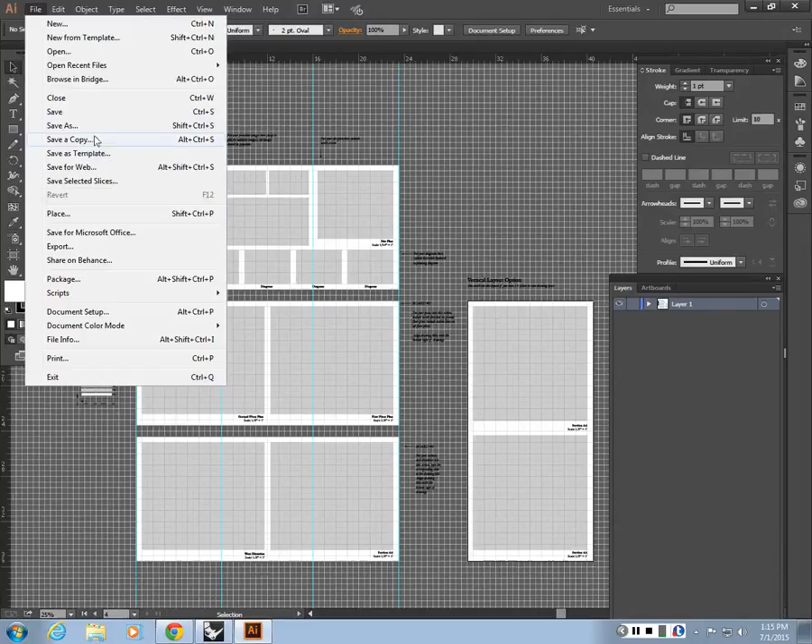I go to File, Save As, and choose PDF. I went over some of these settings with some of you, but the reason why you're setting up artboards is because we have access to what page we want to print. By default we are using artboards, and I have 4 artboards in this file. I can print any one of them directly, or print intervals as well—1 to 4, which is all of them, or 2 to 4, or 1 to 2. If I want to reprint one, I just enter 1 and I'll get a PDF with that single artboard. That's the whole point of using artboards.

So I'm going to do all, and call it test 1. I'm going to save it. Now I get this Save Adobe PDF interface, and here I'm going to choose press quality so that my compression is minimal, so the quality of the drawings is maintained.

Now, if you go to Marks and Bleeds on the left, if these are unchecked, you won't get bleeding marks around your boards. So what do I mean by that? I'm going to save the first one without the bleeding marks, and do the same thing again, calling this one test 2.

Save. Again, press quality, and go to Marks and Bleeds, and just check here so we get trim marks, registration marks, color bars. You actually don't need the color bars or page information—all you need is trim marks, but I'm just going to show you what those are. I'll save it as PDF. Just keep the offset as is, that's fine, that's enough.

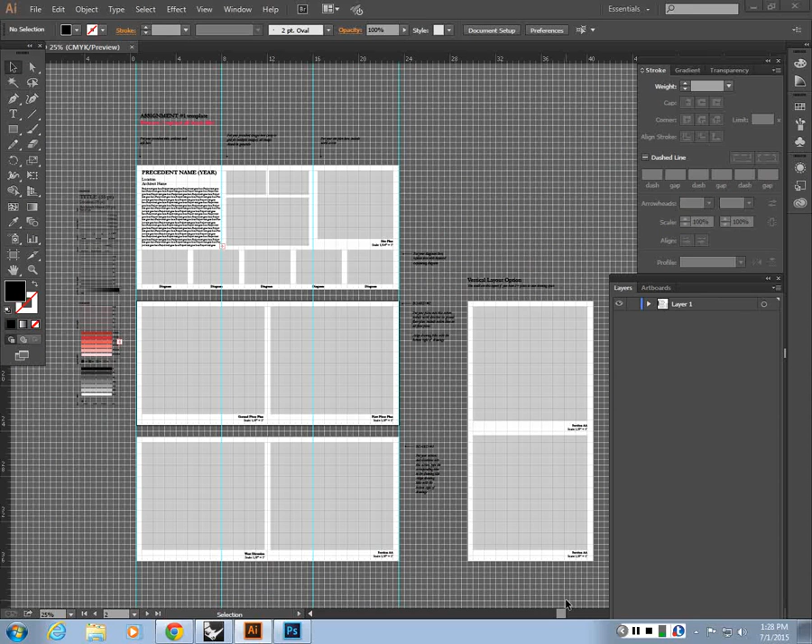Solid modeling in Rhino. We're going to be modeling a staircase, something like this, in 3D. Okay, I'll write the dimensions on the board.

Go to Tools, Options, Units, and change your model units to feet.

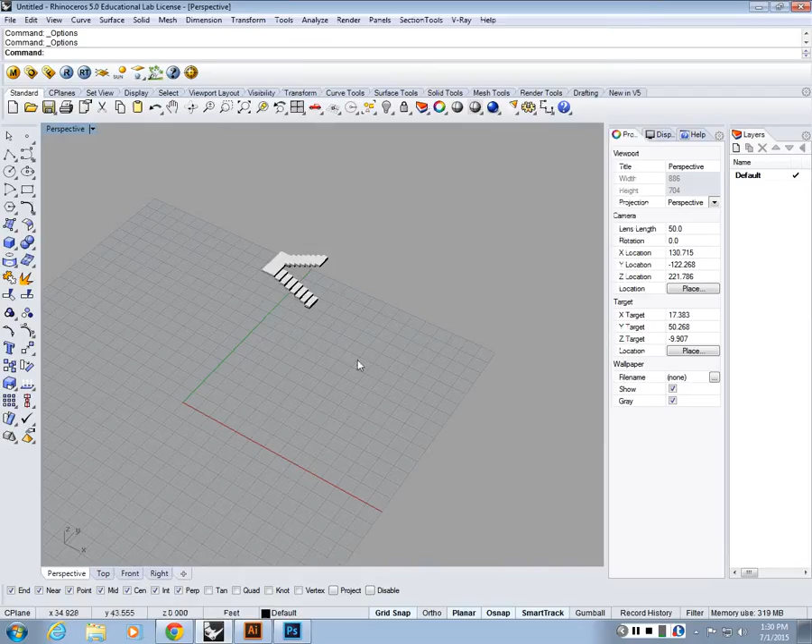After you do that, double click to your viewport to minimize it so that you get 4 viewports. We're going to work on the top viewport for now, so I go to the top viewport. I'm going to draft my staircase in 2D first, then we can use it to do the 3D modeling.

I'm going to start with the line tool. I'll turn on grid snap, and you can also turn on your ortho. So I have ortho and grid snap on, and I have the endpoint snap on. I'm going to come in here, start from the origin, go up by 5.

Then I'm going to go right. I'm going to have 8 steps, so 8 by 2, it's going to be 16. That's the first rectangle.

Now I'm going to have a landing. I'm going by 5, go up by 11, go down by 5. Just watch me for now. And then this rectangle, I'm going to have it on this side as well. So that's the outline of my stairs. These are my 2 runs, this is my landing. I'm doing a 2D drafting of my staircase.

I'm going to put on a layer as well, so these are going to be outline. Then I'm going to have one more layer as steps, and I'm going to switch to that layer, come in here.

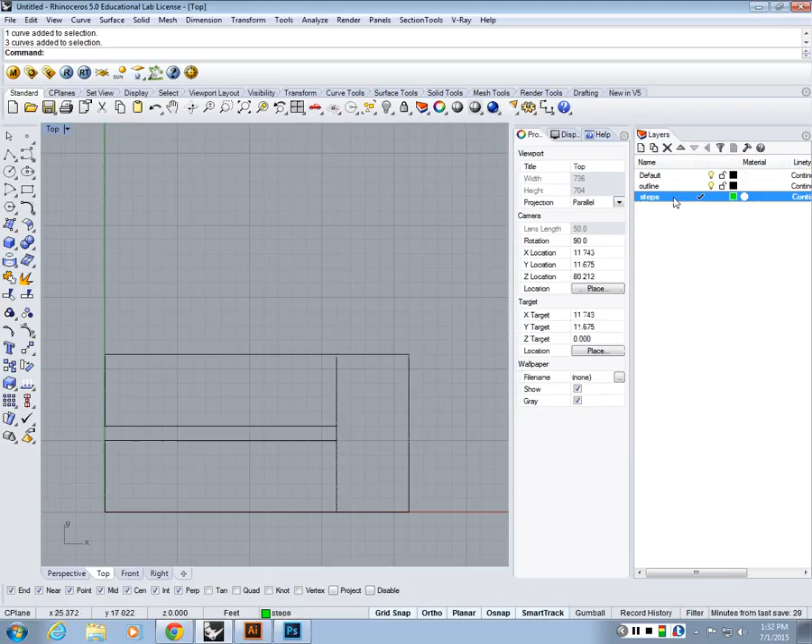Draw a line. Actually I can do this since I have... let's see. Let's draw this, and then offset, distance 2. I'm going to add my steps. After I edit these, I'll select them, do copy, and then put them there. So that's basically the outline of my staircase.

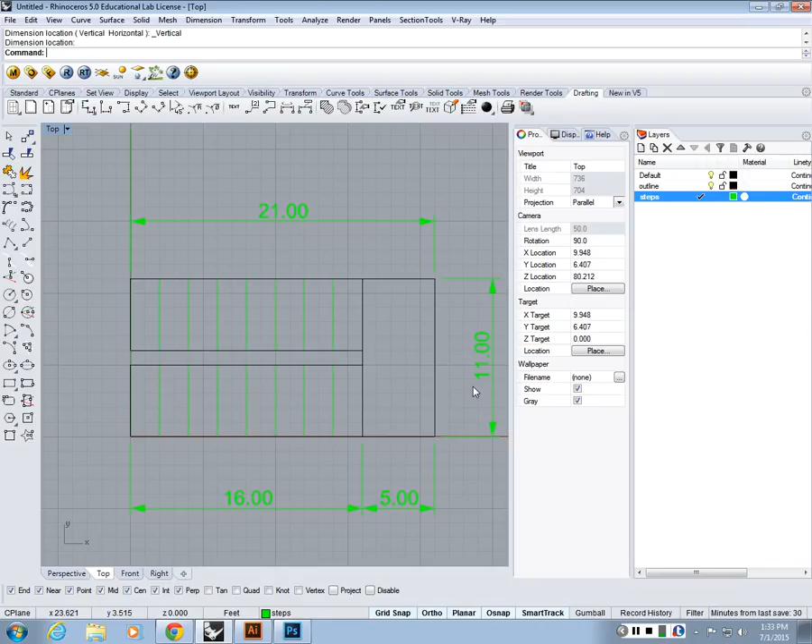I'm going to draft the dimensions so that you could do the same. These are my dimensions, it's under the drafting tab. So that you can draft it as well. Okay, I'll wait, I'll give you a couple.

We're going to start modeling in 3D. I'm going to first outline one of these steps here, so go to the standard tab again. Grab the rectangle, and I'm going to draw a rectangle here from that corner to this corner, so that now I have a rectangle there.

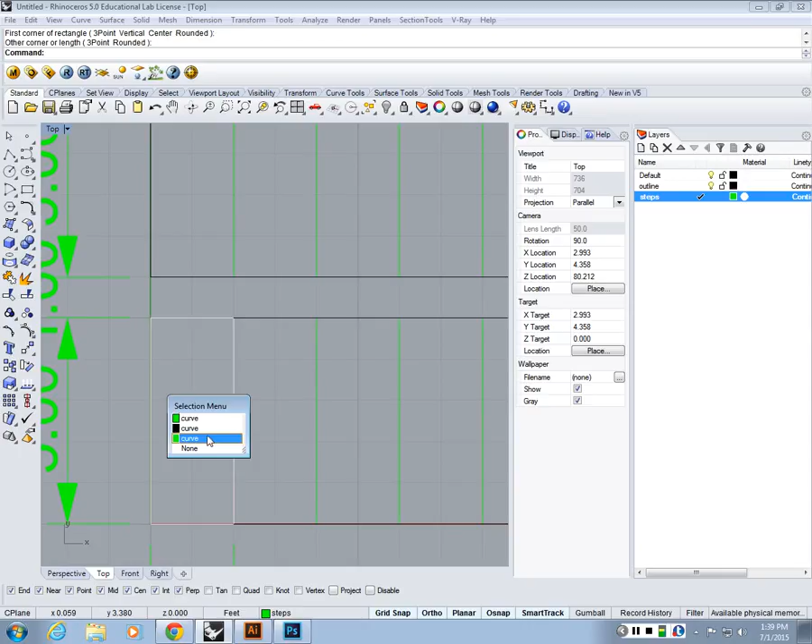Now you'll be drawing over an existing geometry, and when you want to grab the rectangle, if you click on one of these lines, it will bring down a list of items on that intersection, and you can iterate through the selection menu to grab the rectangle you just created. It will be the last one. Right, so it's this guy. Doesn't matter.

Once the rectangle is selected, I'm going to double click to the View tab, move to the Perspective tab, and double click to the Perspective. I want to zoom to the geometry, so I'm going to click here, zoom selected, or the shortcut will be ZS for zoom selected. Once you execute it, it will show you the rectangle, whatever you have selected in Rhino.

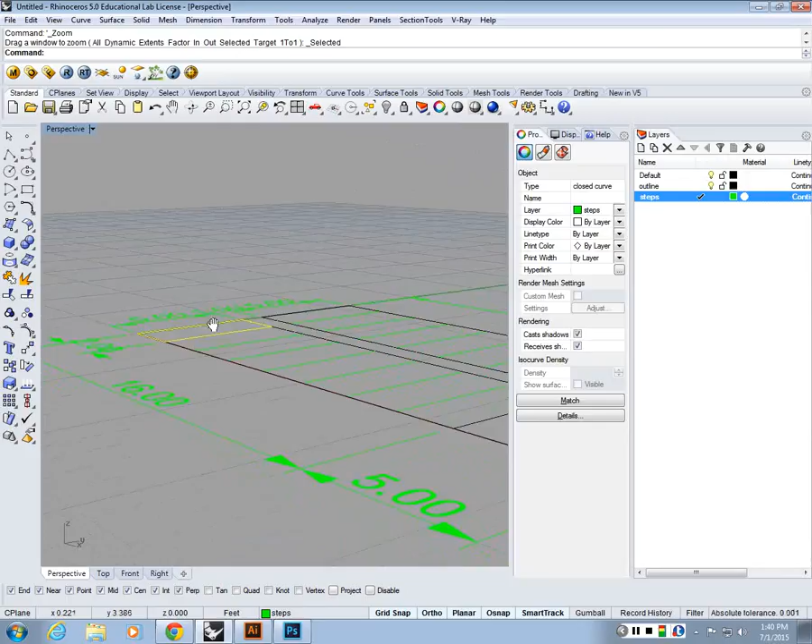You can use the roller to zoom in, zoom out. You can hold right mouse button to do orbiting around it so you can examine it. Or you could hold shift and the right mouse button to do panning, so you can move up and down, orbit, zoom in, zoom out. So that's kind of the 3D navigation.

Now I'm going to turn this into a solid step. I'm going to type in extrude curve, and that will give me a direction for extrusion, so I can go up or I can go down. Look at this value here, look at what it reads. When I go down it's reading as negative, and when I go up it's reading it as positive, because the extrusion also has a direction input.

If you look at the menu, we are specifying a direction, we are not going to extrude both sides, so both sides is set to no. I want this to be a solid extrusion, so hit this to be yes if it's no. You can toggle among these selections by hitting these options. I'm going to make it a solid extrusion. I'm not going to choose the delete input, because if you choose the delete input, it's going to delete the rectangle we modeled.

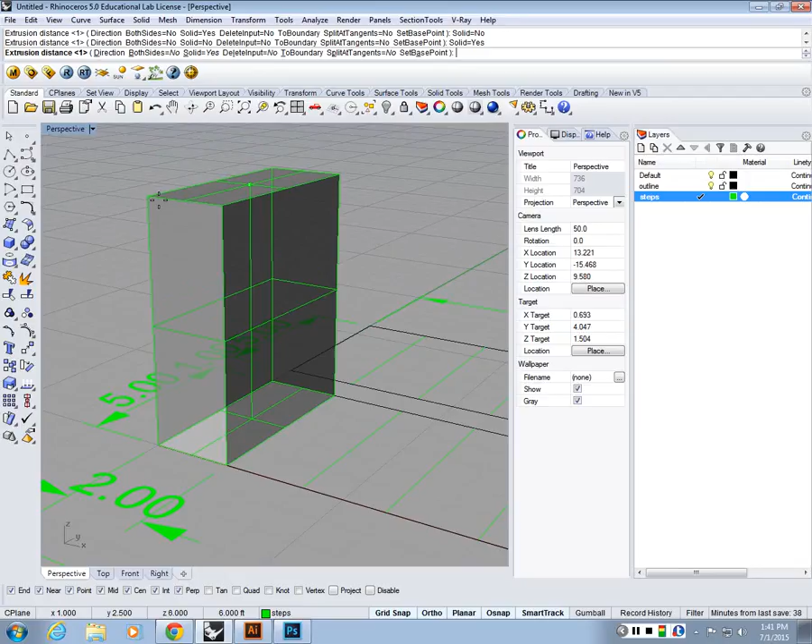And that should be it. The extrusion distance, I'm going to hit 1, enter it here and hit enter. Now I should get a step that is 1 foot high. So this is a 3D model, basically—a 3D box.

Zoom out, roller. Roll in and out.

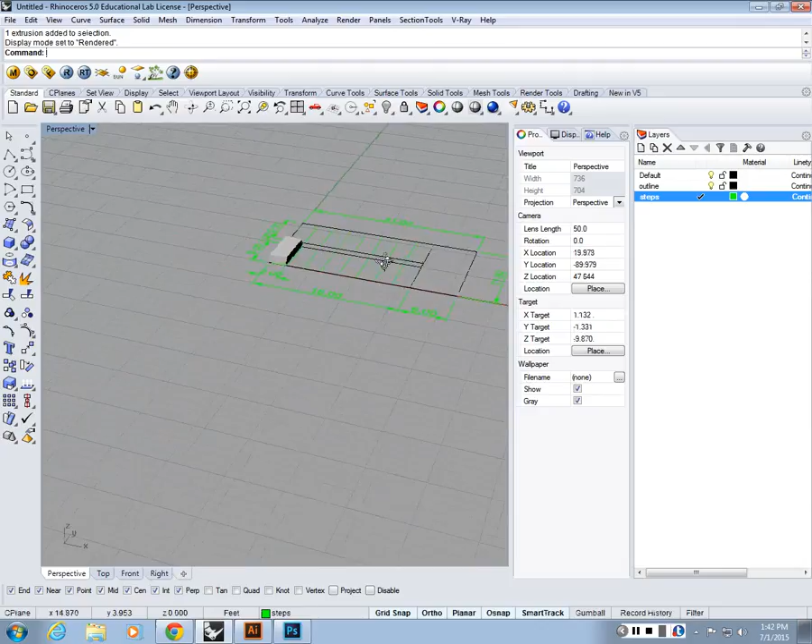If it's not shaded, right click the Perspective tab. Switch to shaded or rendered view. If you're in wireframe, you will just see the wireframe. Right click the perspective, switch to rendered. You could also go to View, Rendered. Yeah, that renders an image though—this is a viewport setting, right?

Now if you got one step, next thing I want you to do is type in copy, select the staircase, select the step. After you select it, right click to confirm, point to copy from. I want you to copy it from this corner to this corner, and then keep doing it.

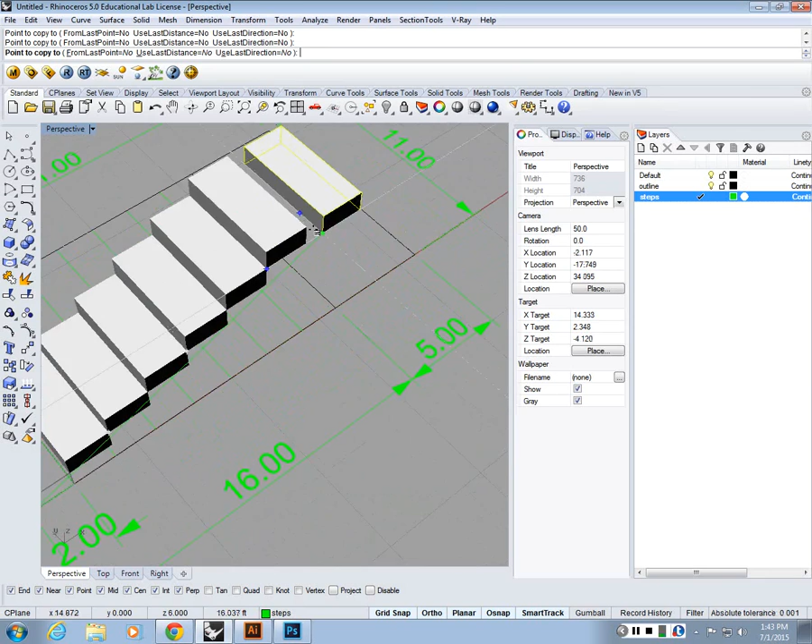So I created one more step. So I have 2, 4, 8 steps here. I'm going to create one more, so I choose the last one, type in copy. Again, I need to use orbiting, panning around to get the right point, right? I cannot just grab it from a weird angle—I may not get the right point. So you want to orbit around it so you can grab the right point. I'm going to choose this corner again, create a copy here.

Now I'm going to create the landing. To do that, I'm going to use the scale function, and I'm going to type in scale 1D, which will enable me to stretch one side of the box. The object to scale is the last step. I'm going to right click.

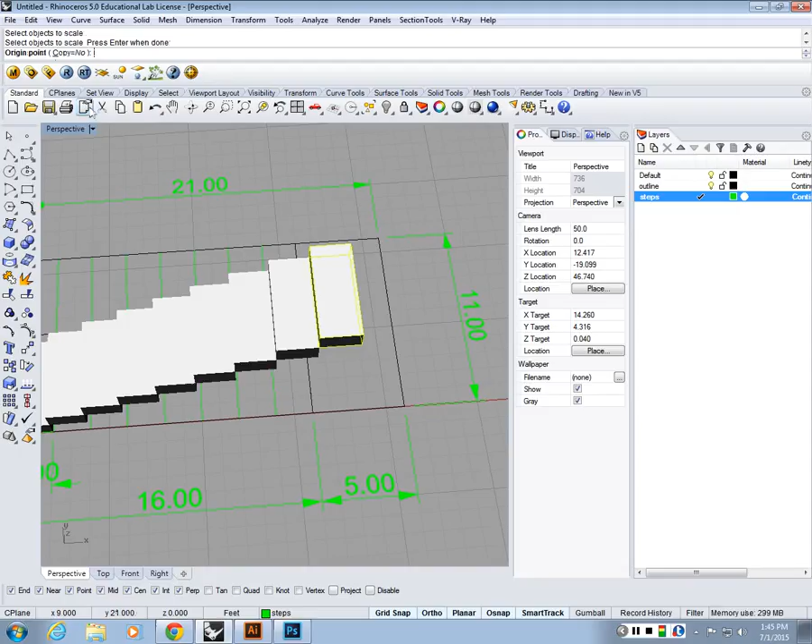Now look at what it says—it says choose an origin point. My origin point is going to be here. I want that point to be locked. And then it says scale factor or first reference point. Let's do reference point. My first reference point is going to be this edge, which is at 2 feet. Now I can stretch this box along that edge, so I'm going to hit 5, and I have scaled the box along that edge by 2.5 point.

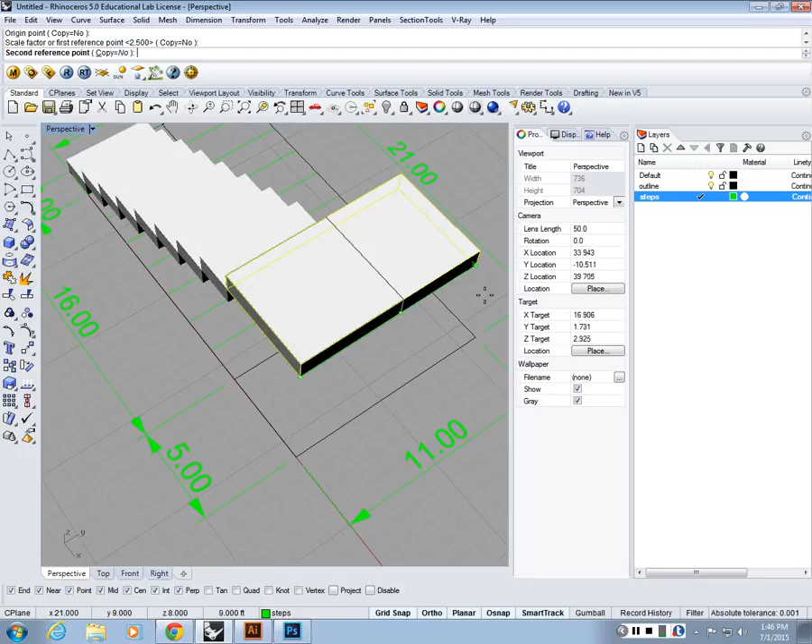Sure, I'm going to do it to the other side anyway. So I'm going to select the same box, do scale 1D again. Origin this time is this corner, the edge is going to be this edge. Look at what it reads—it reads 5 feet, right? That's the width of my run. So I'm going to choose this 5 feet, and I want it to be 11 feet. So I enter 11 on my keyboard and hit enter. So that's my landing.

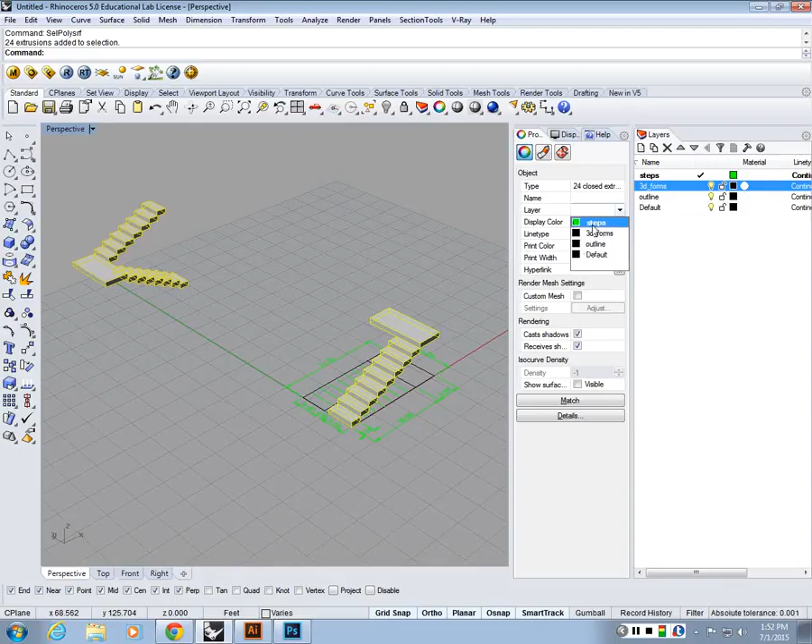So you can choose these by holding shift, and you can go through them one by one, or simply if you want to choose all of them at the same time, you can type in Select Polysurface, and that will choose all the solid objects in the viewport. And then I want to change their layer to 3D forms. And then if I hide those, I can switch back and forth between curves and forms, right? Curves and 3D models basically.

Now I'm going to just select this layer and hide everything else so that I only have solid forms in my viewport. And then the next thing I'm going to do is model the rest of the staircase. To do that, I'm going to choose these steps here—look at how I'm choosing them. I'm drawing a marquee from left to right. The solid marquee selects everything that it encompasses, right? It just highlights, so I get all these steps into my selection.

I'm going to type in group. Group will temporarily put these in a cluster, so if I select one of them, all of the items in that group will be selected, right?

I can basically put them in a group, and then if I want to take them out of the group, I select them and do ungroup, and now they will be individual objects again. So it just helps you model in groups if you have something repeating.

So I'm going to group these items, and then the next thing I'll do is a copy of them. I do copy again, and I want to just move it around, so I move a copy here. It doesn't matter how far it is.

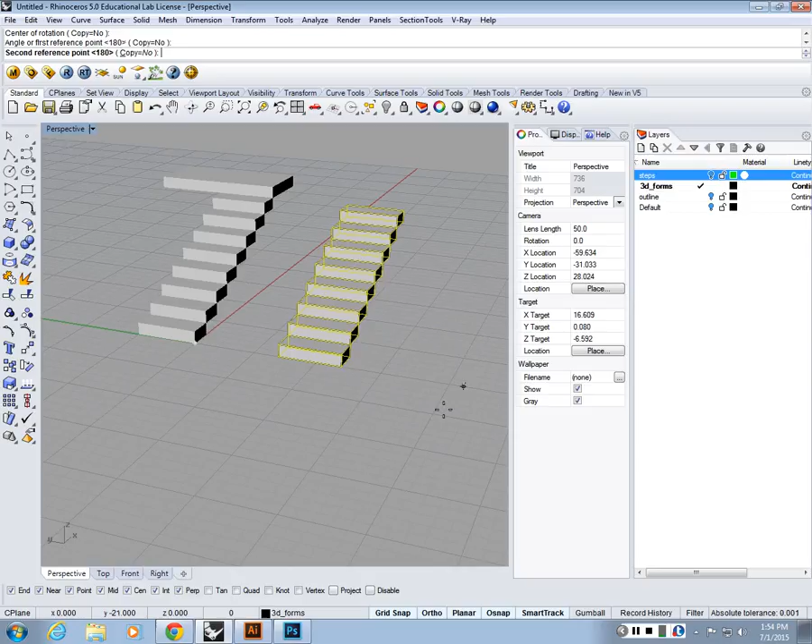I'm going to rotate this guy 180, so I type in rotate, choose these steps. Center of rotation, I'm going to choose this corner. You can either do this graphically by choosing a reference line and rotating along it, or you can just enter 180 and it will flip to the other side.

When you get to there, the last thing would be to move it using this corner point to that corner. So you can just snap it back to where it is.

Okay, that's my staircase. You want me to do it again? Okay, so select these steps, group them, make a copy, rotate 180, and then put it to the other corner.

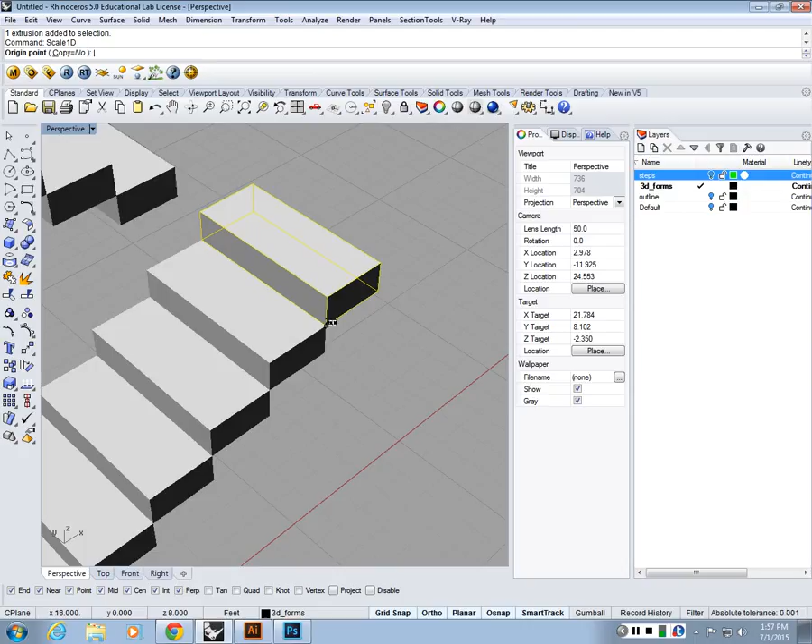Here is my step, I make another copy of it, copying from this corner to this corner. Then I choose this step and type in scale 1D. Follow the instructions for the origin point - the origin point you select will be a point or edge that is fixed on the geometry. So I want the step to be fixed on that corner, and I choose this as my origin.

It says scale factor or first reference point. I'm going to do the reference point, so I can grab a dimension on the object and tell Rhino what I want that dimension to be. I'm choosing this edge - if you look down here, it's giving me the dimension of it. My step is 2 feet, so I'm grabbing the 2 feet edge, and now I'm saying I want it to be 5. I just enter 5, hit enter, it takes the 2 and makes it 5, stretching the geometry along that edge.

The next one, I'm going to do it again to the other edge. I run the same command by right-clicking. Origin point this time is this corner, or it could be that corner, doesn't matter. I choose this edge, and it reads 5 feet. I'm going to type in 11, and stretch it along that edge as well.

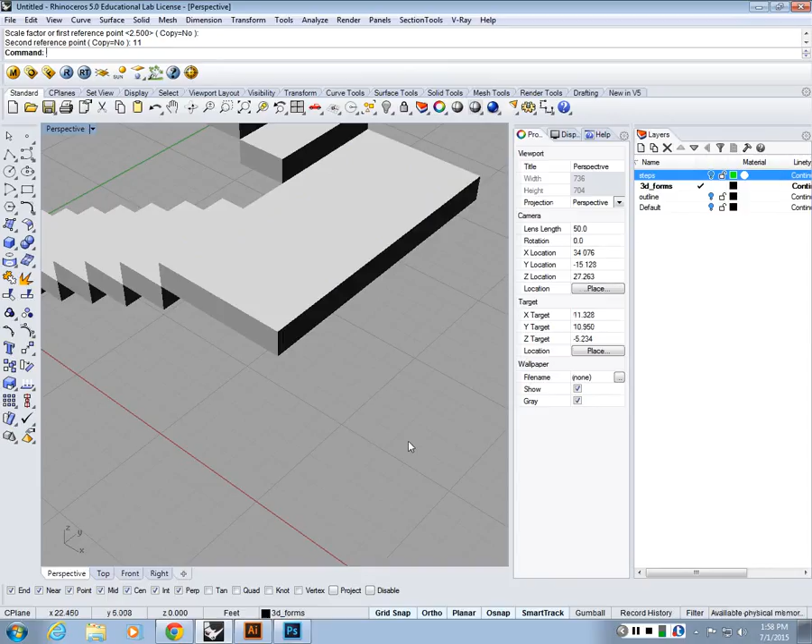Come in here, Tools, Options, Units, back to inches. Okay, you don't want to scale it, choose no. And then go to the top view - your site model right now is 13 by 18, right? That's my starting point.

Now I need some lines here, I need some regions, so whatever dimensions you're measuring. Let's say I have a solid block by 2 inches, so I go 2 inches, then I go by 5 inches, and then close it. Right? So this is how we would do it.

You would come in here, this guy, extrude curve. How many layers is it? It's 3 cardboards. So it's going to be - 1 cardboard is 1/8 inch, so 3 cardboards is 3/8 inches. That's my 3/8 inches cardboard.

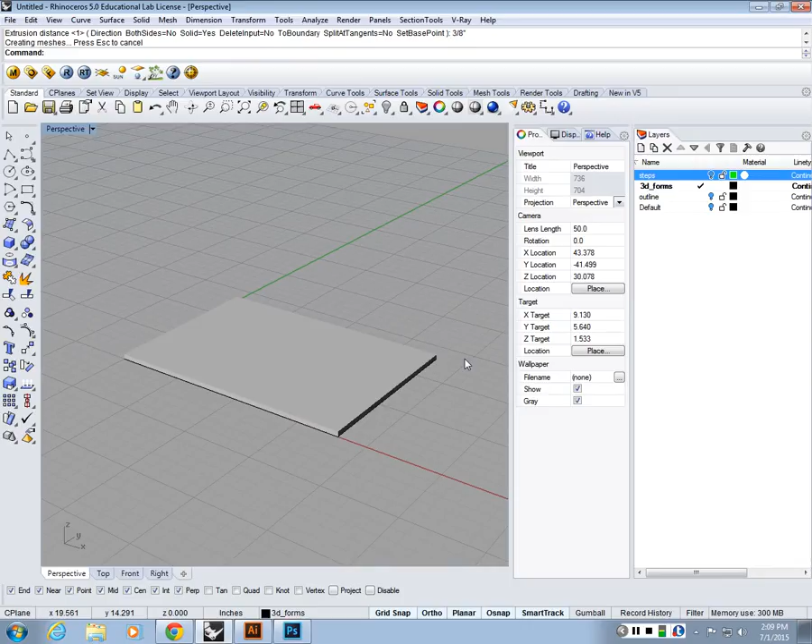You can even do 1 and just make vertical copies of it on top of each other, layer by layer. I'm going to switch back to wireframe, choose this guy, extrude curve - I'm looking at her model. This one goes, I guess, 10 layers, so it's going to be 1 inch.

And then I can move this up here. I'm building it layer by layer. If, let's say there's another layer here, I can copy it, copy this corner here.

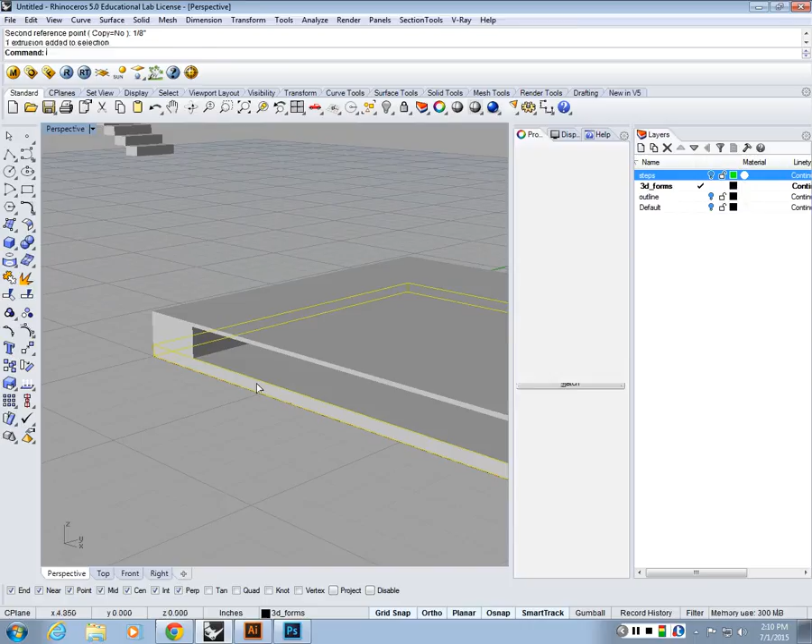And maybe this guy is 1 layer, I can do scale 1D, choose this edge and make it 1/8. This is 3 stacks of cardboard, this is 10 stacks of cardboard, this is 1 stack of cardboard.

And the outlines could be different - I don't know what your model is, but I want you to start working on that. Okay? So she has a stepped landscape, so I want everybody to follow me for a sec. I'm going to draft something that looks like hers, basically.

So I'm going to go by 5 inches, then let's say I go 8 inches here, and then close it up. And then I'm going to do from this side, I think it's another 6, and then this way, 12, and then 7.

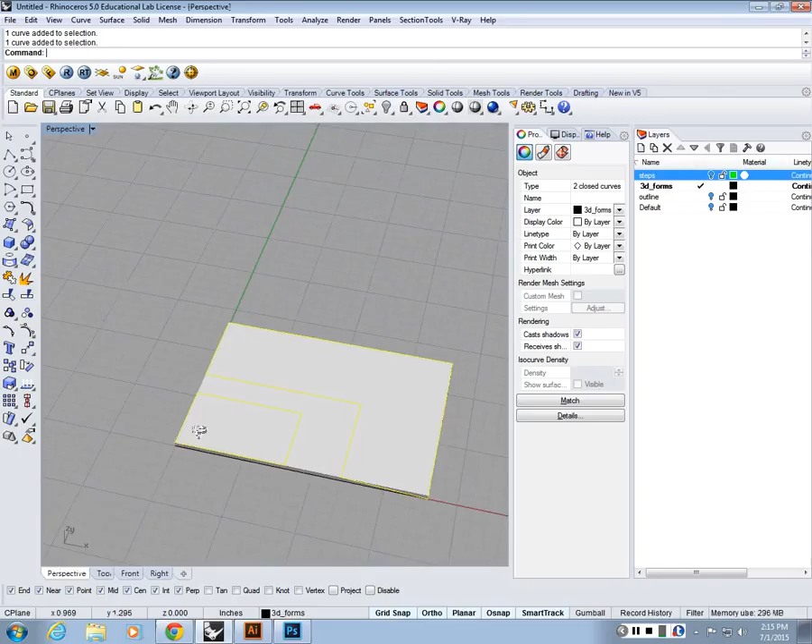Right, so it's something like this. On her model, these guys are solid extrusions. So I'm going to extrude this guy by 1, and I'm going to extrude this one by 1 as well.

Let me fix that quickly. So she has steps here, and she's asking me if she has to do each layer by layer. You don't. You can do it this way, out of solids. So measure the landing here. What is the landing? Let's say it's 1 foot, so go 1 inch. I go to the other side, close it.

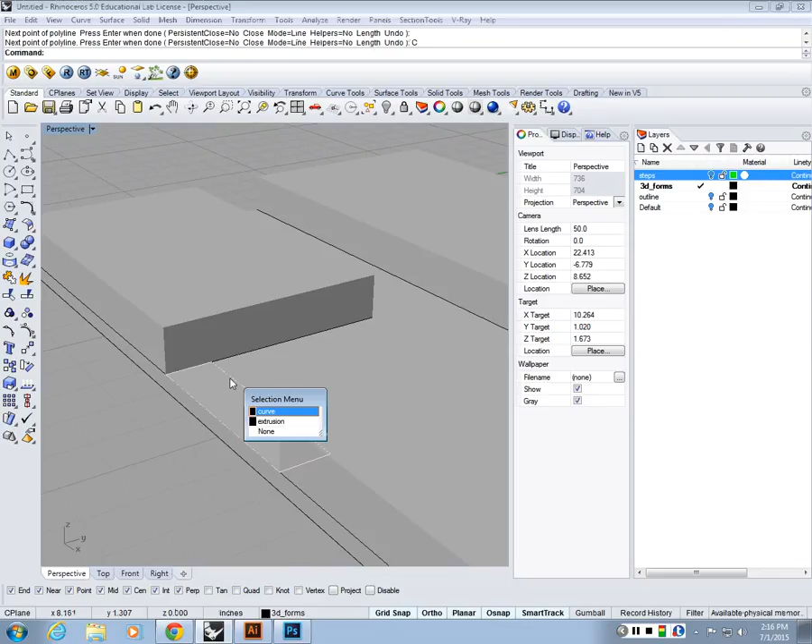I'm going to extrude this guy by 1 as well. Now I can add the steps here. I can model a little staircase here that goes all the way up. So all I have to do is model 1 step and then make copies of it until I touch the ground. How do I do that? I can just grab this guy, copy, make a copy of it here.

What is one step size? I'm going to do scale 1D, choose this edge. Let's say that edge, 1 inch is going to be 1/4. That's 1 step, height-wise, 1 step is going to be 1/8. So that's 1 step, and then copy. Choose this corner, copy it up. Boom, boom, boom.

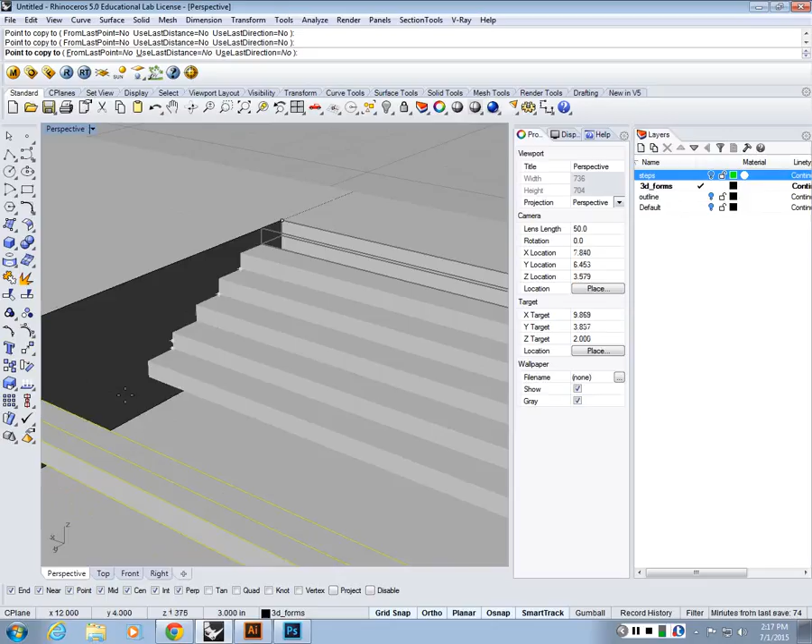That's it. It's easier, no? Find what the solid extrusions are and then add the steps, add the layers on top of it. Okay? Does that make sense?

If I have something here, I can just go up 1 layer, break this down. Let's say this is 3. Maybe there's another one. And this guy is actually shorter. Right, let's say this is 2. And then height-wise, it's like that too.

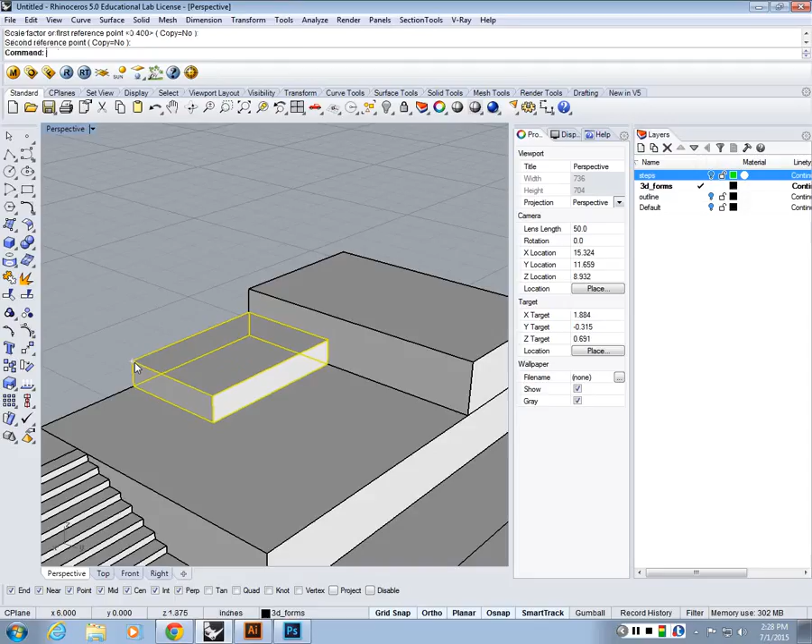So rather than stacking up 8 layers or 4 layers of these L shapes here, I can just break that whole box, that whole mass, into these 2 blocks. And that's what I want you to do basically. And then if there are steps here, you can add the steps later. So you can add model steps here and model steps there. You don't have to draft it layer by layer.

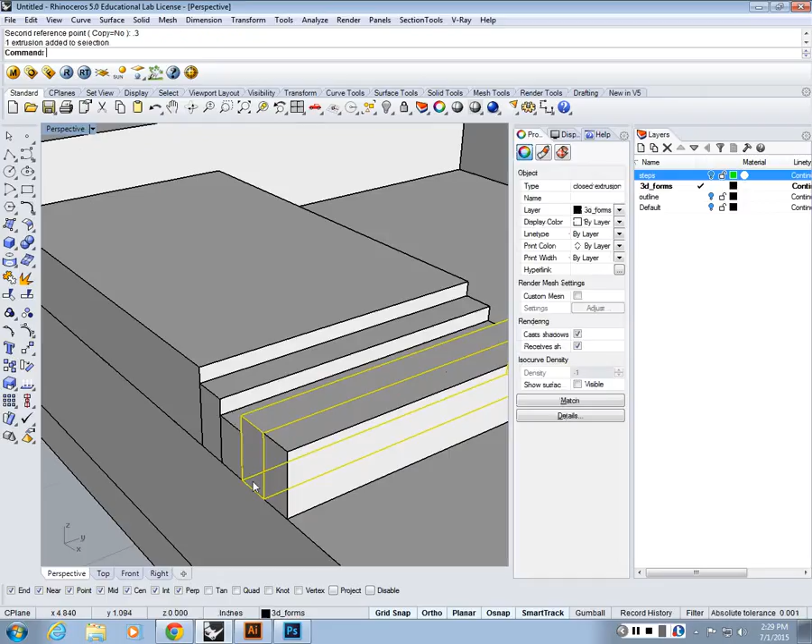Alright, I'll show you what I mean. So copy, scale 1D, this guy is going to be 0.2, and then height is going to be 0.4. Scale 1D, the height is going to be 0.3. Scale 1D, 0.2. Scale 1D, 0.1. I can add those blocks.

Everything could be added up afterwards. And if I need to stretch these, I can also grab the staircase, do scale 1D to all of them at the same time along a common edge they're sharing. So I want to maybe stretch these to be half, so I can just stretch all of them along that edge and make them half. And maybe this guy is repeating, so I can choose that, group it, and then copy it and place it here. You can reuse some of the models you're making. Alright?

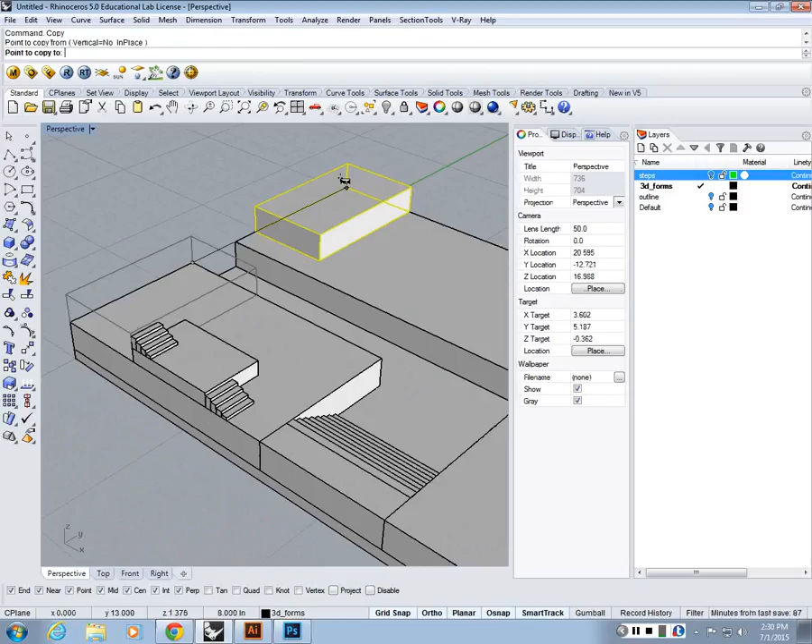I'll actually have fun with mine as well, while you guys are working on yours.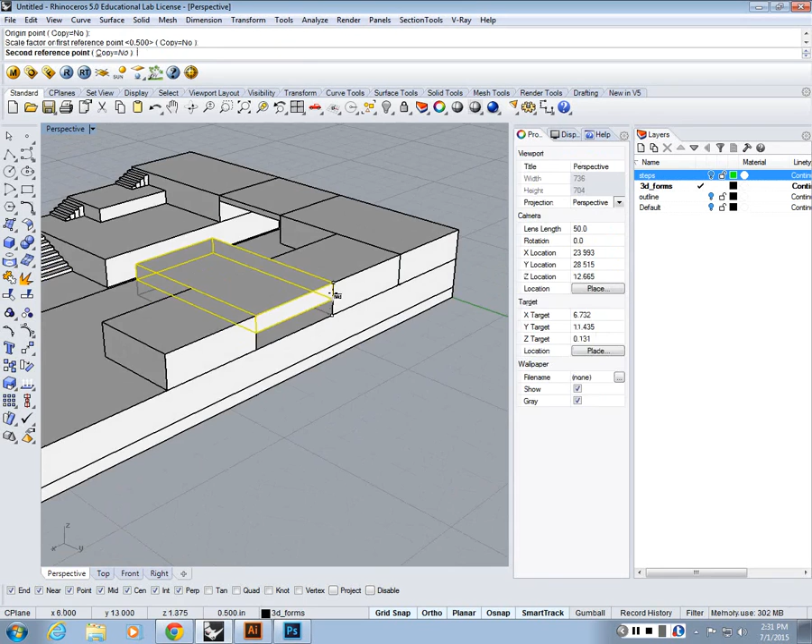So maybe there's another solid form here. Copy, I'm going to bring this guy here. Scale 1D, and the nice thing about scale 1D is you can use reference geometry. So I'm choosing an edge on the block, but then for reference I can choose any other point in the model.

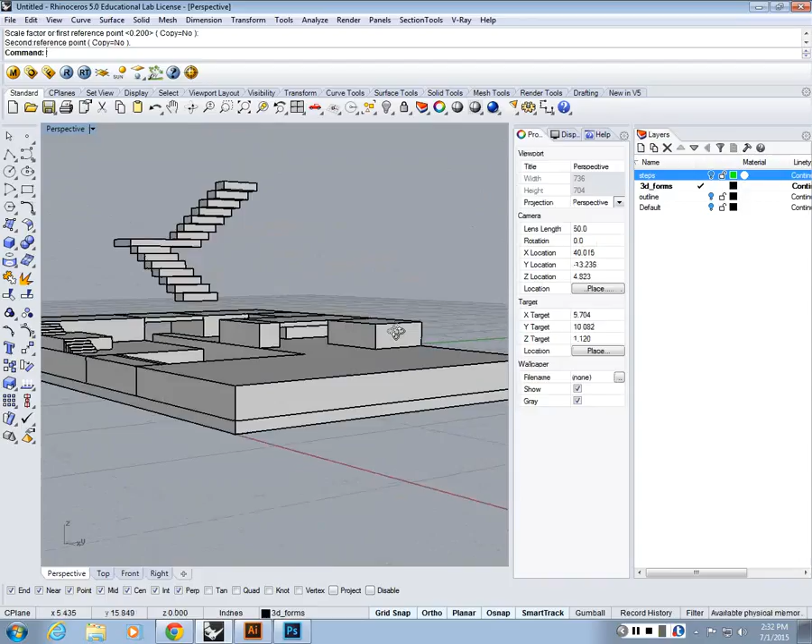So let's say I want to align this edge to this edge. I can grab something from that edge, right? You guys see how that snapping works? I'm choosing that edge, and then it finds the projection of it and does the scaling for me. I can do the same thing vertically. I can choose that corner again, and it will find the projection and lock it there. So it's like using it as a reference.

When you switch to the top view, when you start drafting stuff, you may snap to three-dimensional positions, and then your polyline may not be flat anymore. Let me show you what I mean by that.

So I'm going to create a new layer here, let's make this red curve. So let's say I want to model a rectangle here. I grab the rectangle, the polyline tool. I come in here, I'm snapping to an endpoint. I don't know which endpoint it is yet, so I'm just grabbing here, grabbing one here, grabbing one here, here, here, and then closing it up. So let's see how that rectangle looks like.

That's how it looks like in 3D. Okay, so for these intersections, it found the right intersection, but for this one, it grabbed a point at a different height. There are two ways to fix that. This is because when you're clicking on that point, there are multiple end geometries where the cursor could snap to, and that's why Rhino is going with the best, but oftentimes it's not the best for you. If you have this situation, you can pull all those points or the geometry up to a level using set point command.

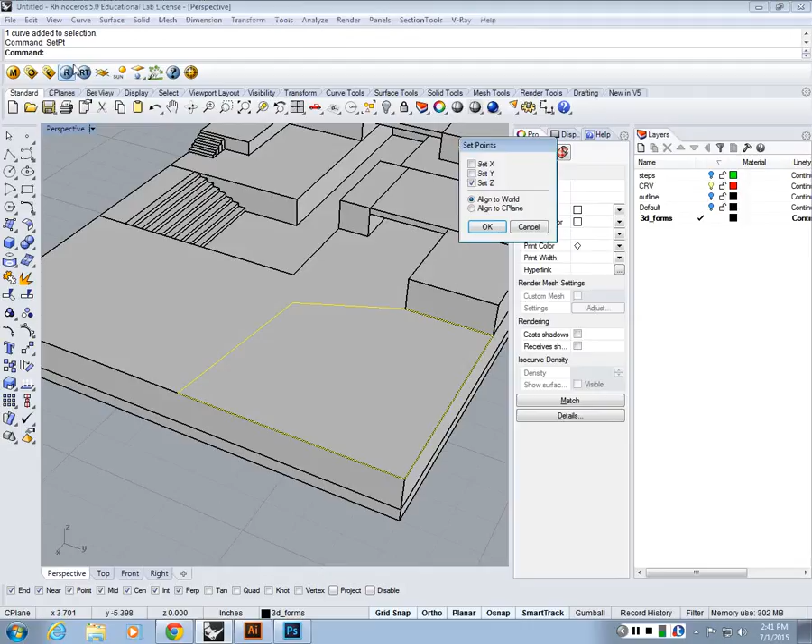Once you type that in, under the set points option, just enable set Z. Uncheck set X and set Y.

This will enable you to override the z values of the points of the geometry. So if I do set z, hit OK, it will ask me to choose a z value for these points. I can choose this corner point or this height, and it will pull all the points of that polyline to that z value. I'll do it again.

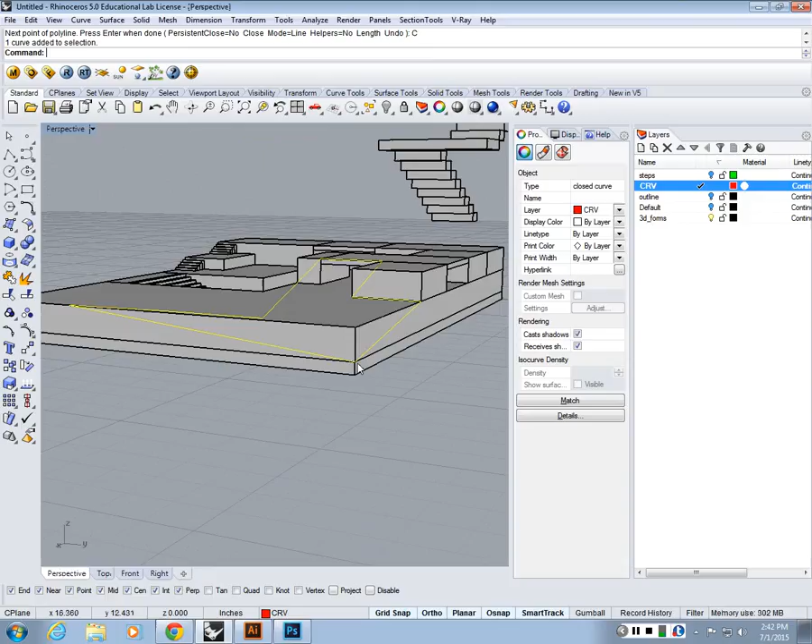So I'm going to do the same drafting. Let's say, started from here, went here, grabbing some stuff here. All I'm trying to do is snap to 3D geometry that I know at different heights, and I'm getting an outline. So that's what I got, right? This point snapped here, this point snapped there, this point snapped there. So they're at different heights basically in the model.

If you get this situation, you can fix them by typing in set point, and I want to do set z. Hit OK. I want this polyline to be drafted at this level, so I choose a point on that level, and it pulls all those points up to that level. Then I can do my extrusion, because the other one wouldn't extrude properly. It won't close faces.

Another way to fix this issue is to enable projection. Rather than drafting some polyline in 3D and pulling it up, if you enable project under object snap options, every time you're drafting in a viewport, it will find its intersection at the 0 height. So whatever I'm clicking on will be drafted on the construction plane, with the height set to 0 for the points.

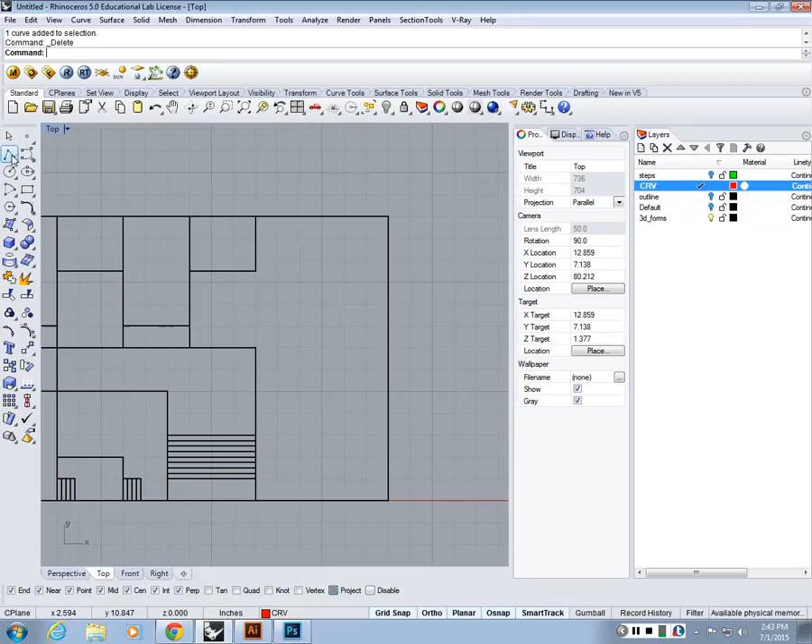I'll do the same outline again, grabbing these points one more time. This curve will be drafted at the bottom of the rectangle, on the construction plane, the grid. Do you guys see this plane, the X and Y? So if I enable project, whatever point I'm clicking from, it will find its projection to the construction plane.

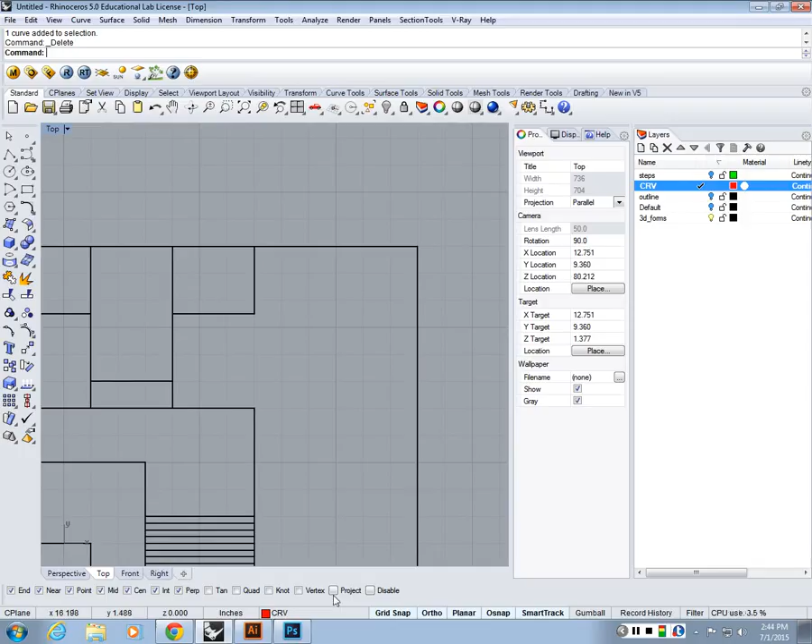I'm seeing confused faces, so I'll explain the technical background of what this is. If I have no projection, how are we drafting stuff? We are snapping to geometry, right? I'm trying to get an outline, whatever the outline is. But if you look at my model, along this edge there are different z values. And when I'm looking at a top view, I'm not seeing any of those z values.

Let me show you what is happening in 2D and 3D simultaneously. If I'm here, trying to grab a point, look at what it grabbed in the 3D model - it grabbed that top point. Then I come in here, and it grabbed that top point again. I come here, it grabbed that one. I come down here, it grabbed even another point at the bottom. I come here, here, here, here. Although my line is consistent in top view, in 3D it's not, because it's snapped to different points.

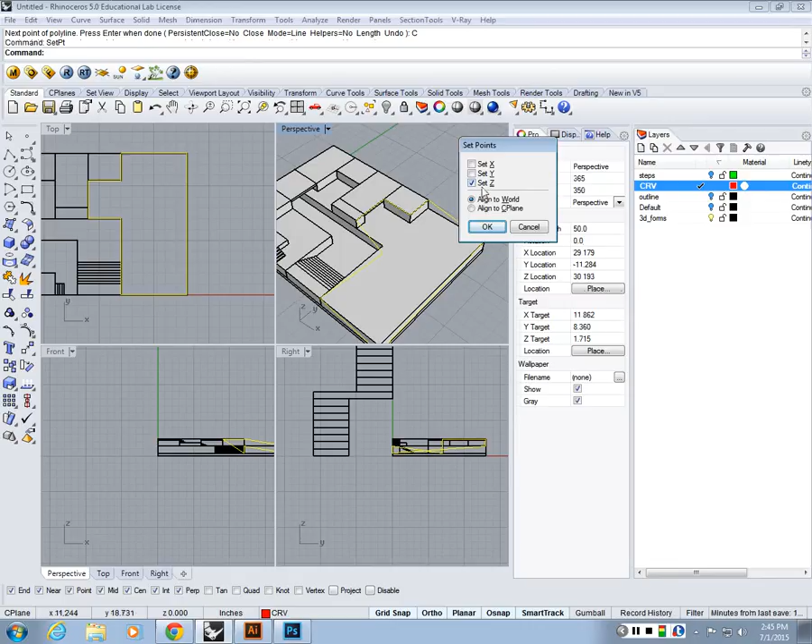If you get a polyline like this, you can fix it using the setPoint command, which will enable you to override x, y, z values of the points of the polyline. That's what I did - I did set z, and set the z value of the polyline to be at this level, so it pulls everything, compresses the whole polyline to that z. But I don't have to deal with that.

I can also go to the top view and enable project, and now whatever I'm drafting here will be drafted planar, on a planar surface - on the construction plane, this grid you're seeing, where the z value is 0. So although I'm going to grab some geometry, some reference from the 3D model, it will find its projection to the construction plane, and give me a planar curve. I can use that curve for extrusion, to move it up, to scale 1D - all of those operations I can do.

So whatever you're drafting in top view, enable project so that your lines stay flat. Or if you have drafted them at different heights, you can use the setPT command to pull them up. I'm going to do the same model that I did, but I'll do it in a different way.

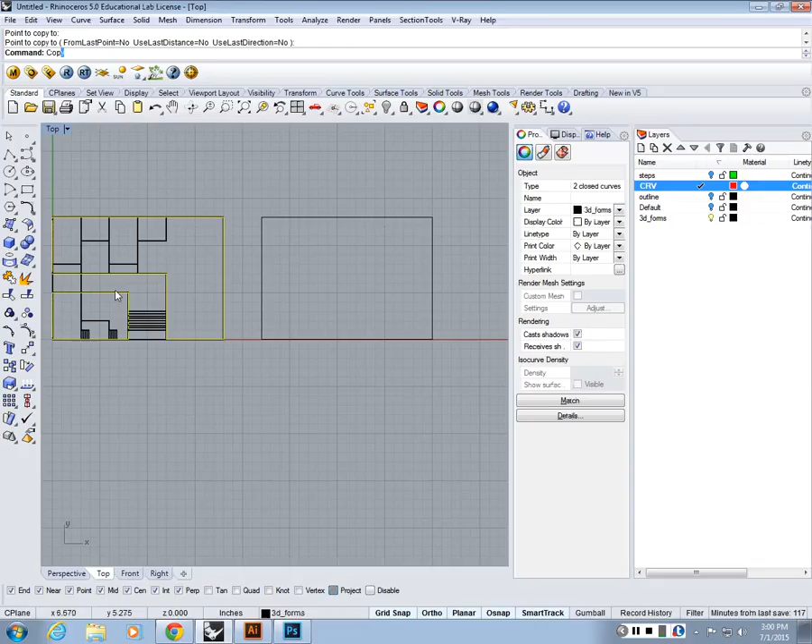So we can go over some of the Boolean operations. I'm going to make a copy of it, and then make copies of these two rectangles. The way I did it was I extruded these individual pieces as solid models, solid extrusions, with a base as an extrusion. Now I'm going to do the reverse: extrude the whole thing as a solid, then subtract this as a void. That's called a Boolean operation, and the Boolean operations are located under solid tools.

If you go to the solid tool tab, the Boolean operations are the first four. There's Boolean Union, which joins two geometries. Let me do a quick rundown. I'll make two intersecting prisms, and make four copies to show you what each operation does. So this first one is going to be union.

You run the Boolean Union command, or hit this button, and Rhino asks you to select surfaces or polysurfaces to union. It's asking you to choose shapes to join. I'll choose this guy and this guy, and once the selection is done, press enter or right click. Now this has become one object, and the geometry at the intersection is gone, because the two solids are intersecting there and Rhino takes it out since there's no need to keep it as geometry. This is a complete solid right now.

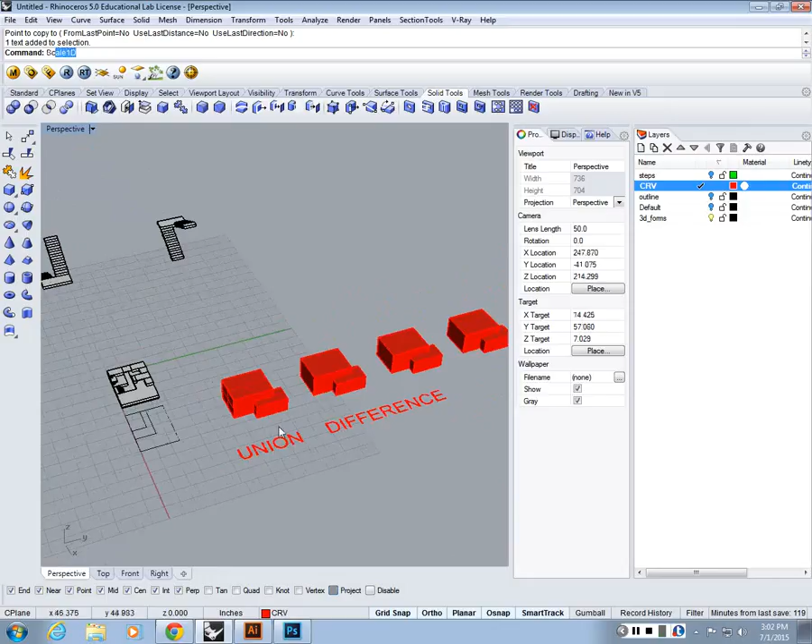The second one is difference. When I do a difference, it says select surfaces or polysurfaces to subtract from. So I have to first choose a geometry that I want to carve from. I want to choose this guy to carve from. Once the selection is done, confirm by right-clicking or pressing enter. Then the second command says select surfaces or polysurfaces to subtract with. Now I want to take this guy out, so I told Rhino I want to subtract from this guy, and subtract this guy. Now it takes it as a negative and carves it out, using that solid information as negative.

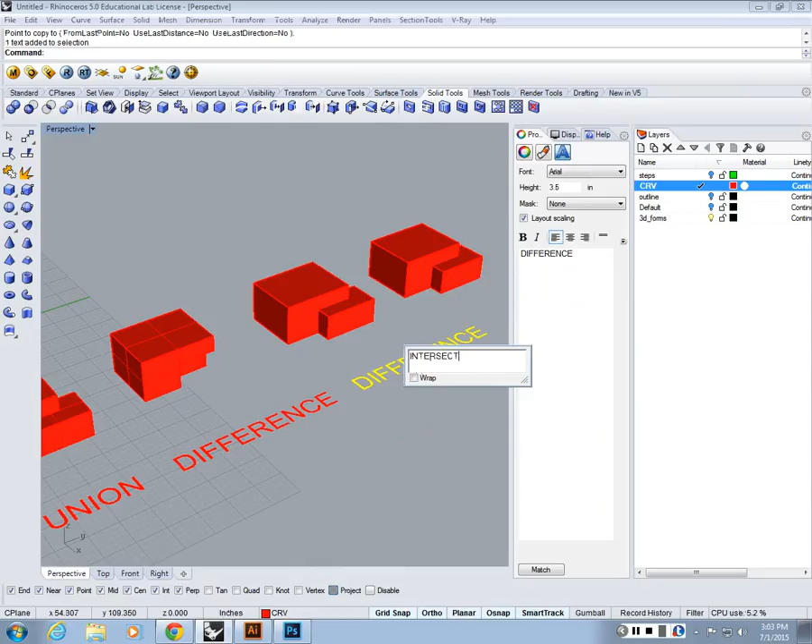The next one is intersection. What do you think the intersection is going to do? It's basically going to keep wherever the solid forms are overlapping and get rid of everything else. The previews kind of give you a hint. If I do Boolean intersection, it says select first set of surfaces. I choose this guy, right click. Second set, I choose this one, right click, and Rhino calculates where those two solids intersect and preserves that geometry.

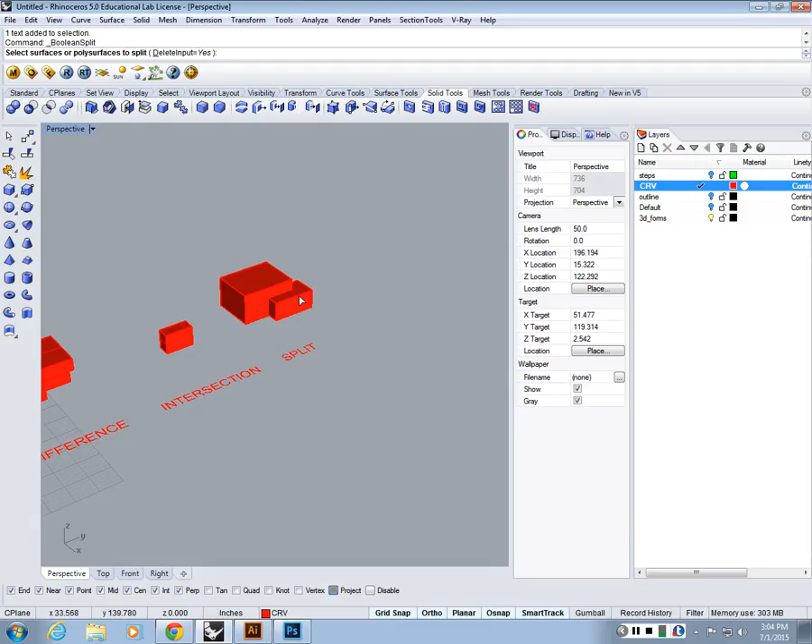Deletes everything else. And then the last one is Boolean Split. It says select surface or polysurfaces to split. I want to split this guy using this guy. So what this does is use this as a cutting object and slice the other geometry with it. If I delete this one, I'll have two portions of the solid where the object cut it, so it's kind of a combination of difference and intersection, preserving both geometries of where the intersection was happening.

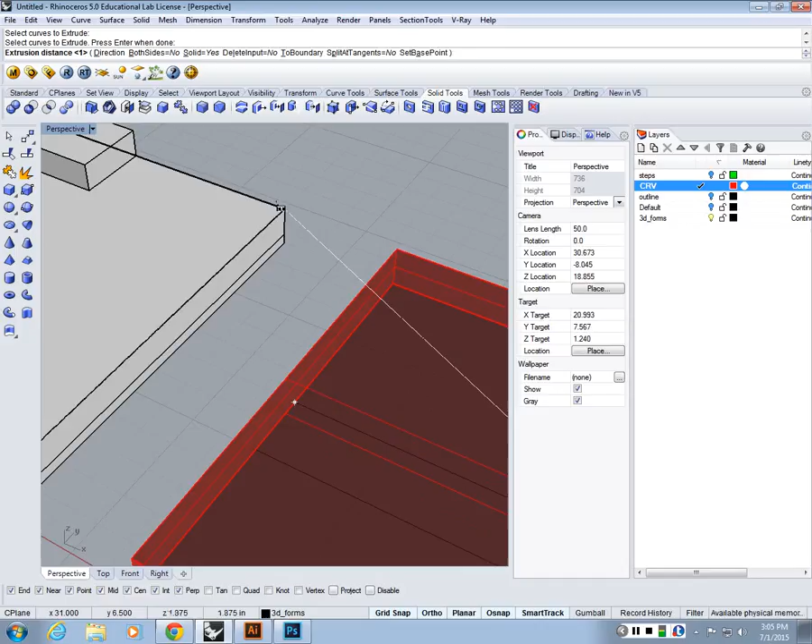So now if I want to apply this to site modeling, first I create a solid for the site. I'm going to do extrude curve again, choose the overall site and extrude it up to this height, but you want to take off the project option so you can select a point in Z. That's my solid extrusion, that's my site. Then I go to the top view and I need this as a solid form that I can subtract with.

I could also do it this way, by modeling primitives there. So I could model a box here, that's a box, and the other box is going to be here. So I want to subtract this shape from this shape.

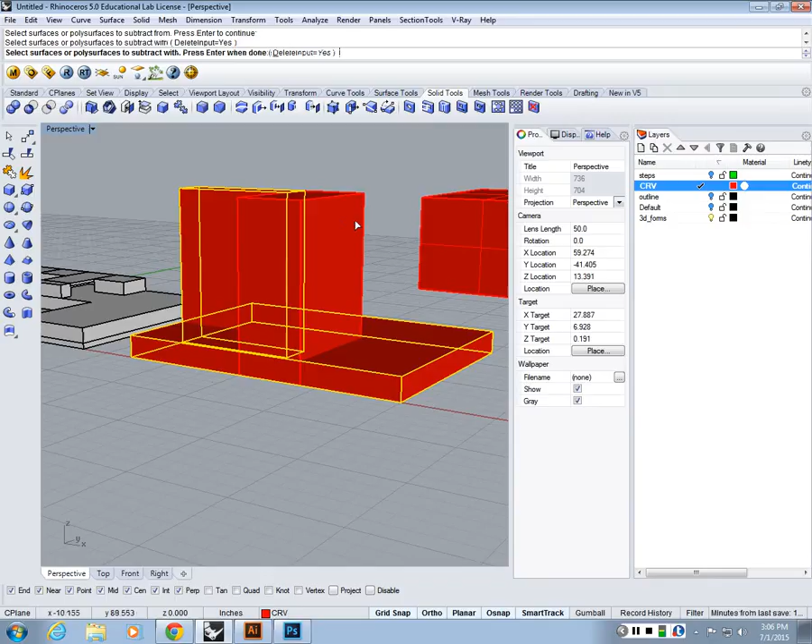So I do Boolean difference. Select surface or polysurfaces to subtract from. I want to subtract from this guy, right click. Then polysurfaces to subtract with, I want to choose this and this. You can choose multiple inputs as well. Now this guy's basically subtracted. Now I'm missing my base, so I'm going to just bring in my base.

So my base is going to be here, and I can also do scale 1D simultaneously to multiple geometries if they are sharing the same edge. So if I want to stretch these guys vertically, I can do scale 1D and choose this height, which is consistent among both solids, and stretch them to that height.

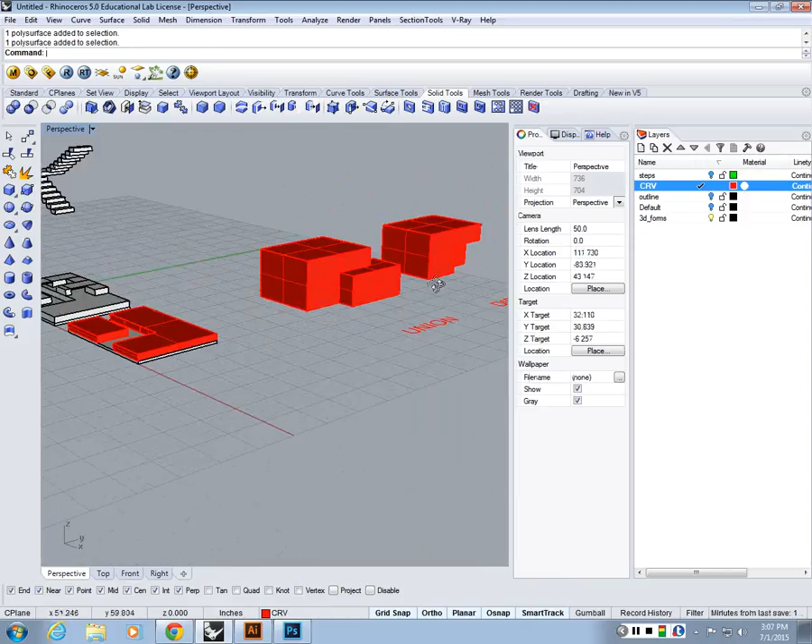Okay, that's another option you could do. It's called Boolean Operations, basically a form of solid modeling, and you can do it with primitives. So you can union, join, difference, intersection, split. You may want to do unions before difference, so you can split multiple geometries afterwards. So I can basically join these three forms together.

So I could type in Boolean Union, and this will become one solid. And now if I have something else intersecting with it, I can do subtraction from it. Any questions about this for now?

Who wants me to go over it again? Who didn't understand what I was doing? Can I see hands? Who didn't understand what I was doing, or how I did it? Please, if you have any questions, just ask me.

How about I'll do more? Yeah, that's just practice, that's why we're doing the workshop. And I'm recording the session as well, so you would always have access to how to do this. So I'll do another model here, and you can use Boolean basically to do that.

So I'm going to start a new site model. He has steps going in two directions and then a tunnel cutting through them, right? So let's have some drafting lines. Let's say the steps go up to 5 inches this way, and then 8 inches this way, 5 inches this way. These are where my stairs are, right?

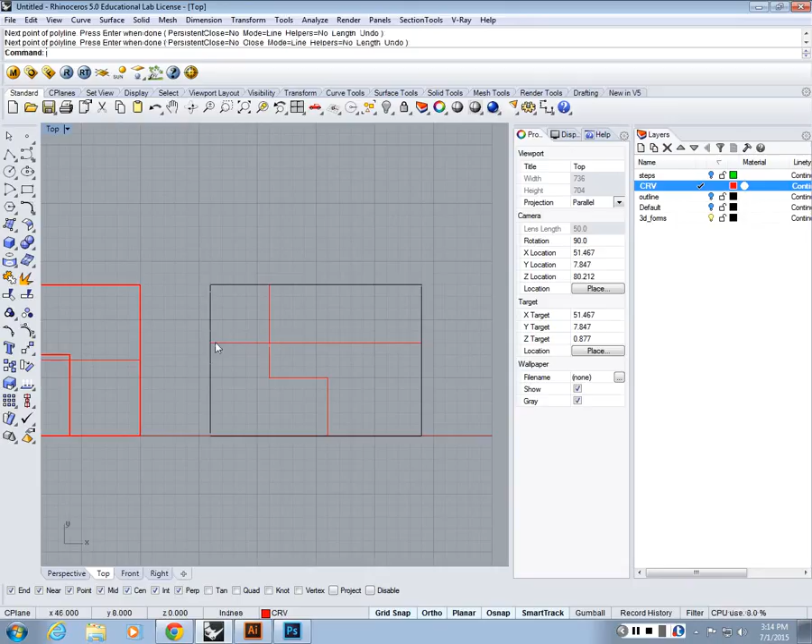And then my tunnel is 5 inches off, and I'm going to make an offset, let's say by 0.5. So this is a tunnel. There are going to be steps here. Is that correct? Okay, so what I'm going to do first is get a base, and then I'll get a top layer here.

So I can do all of this in 3D as well, so let's work on it in 3D. I'm going to do extrude curve, come in here, do -1/8. So that's my base, and I'll move this guy to be at the 3D forms layer, so that I can see my drafting lines in my solid forms.

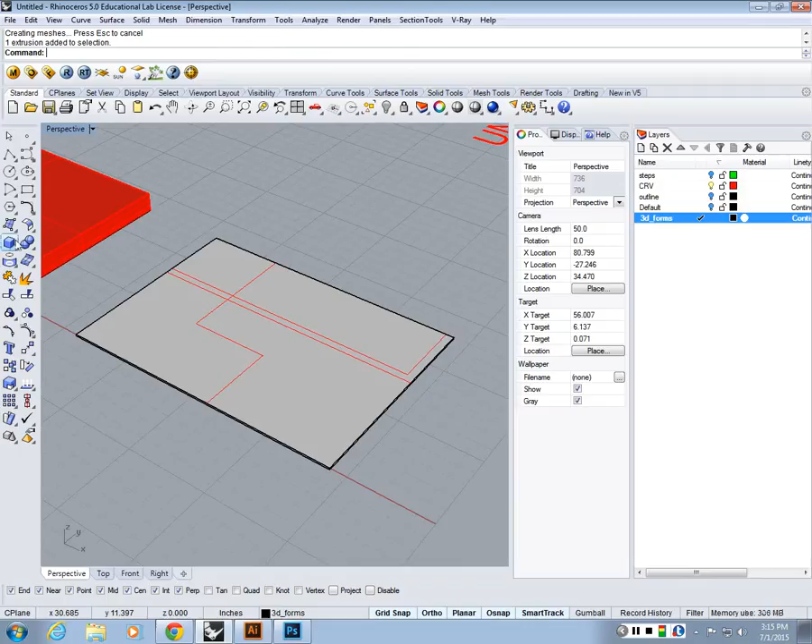Then the next thing I'm going to do is switch to this one, and let's see. I'm going to have how many steps here? I'm going to have 5 inches, let's say, if 11... let's say half an inch is a step. Okay, half an inch. I'm going to explode these 4 lines, choose these guys, and then join them.

So that's technically my step. And then I'm going to do offset, distance 0.5, and then add my steps to the corner. So that's what's happening, right? So I have kind of a ziggurat going on this edge, and then I have to dig a tunnel through it.

Right? Okay, now what I can do is model the largest step. It may be good for you guys to watch this. What I'm going to do is model the largest step, and then make a copy of it diagonally, and then do Boolean subtractions to the overlapping edges. So I'm going to first trace this large step here.

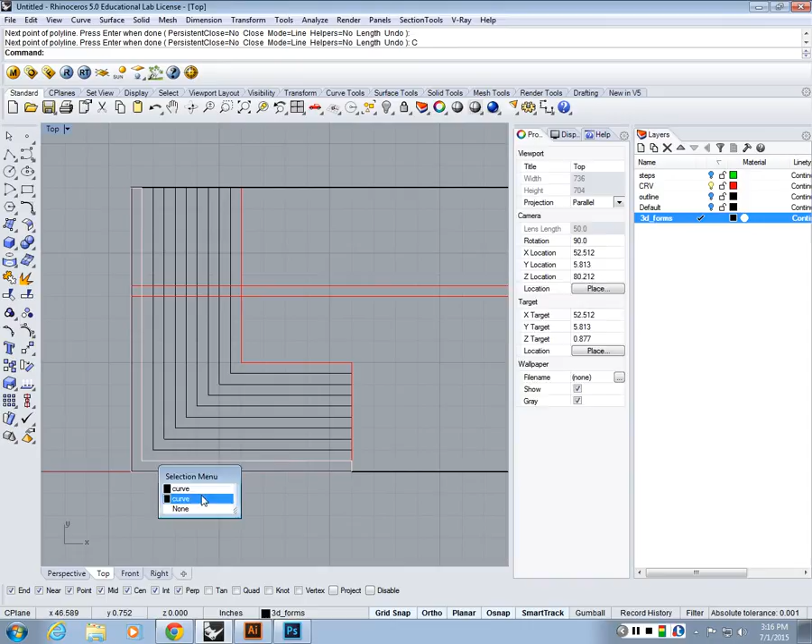So pretty much like the single step we did for the staircase, that's my single step. Then I'm going to do extrude curve 1/8. And I'm going to grab this guy and make copies from this corner, right? So I keep going, corner, corner. So I'm kind of stacking them up.

Let's see, I need one more. So those are my corner steps. Now I'm not done, because I need to trim these edges now that are overlapping. How do I do that? I can just model simple solids here.

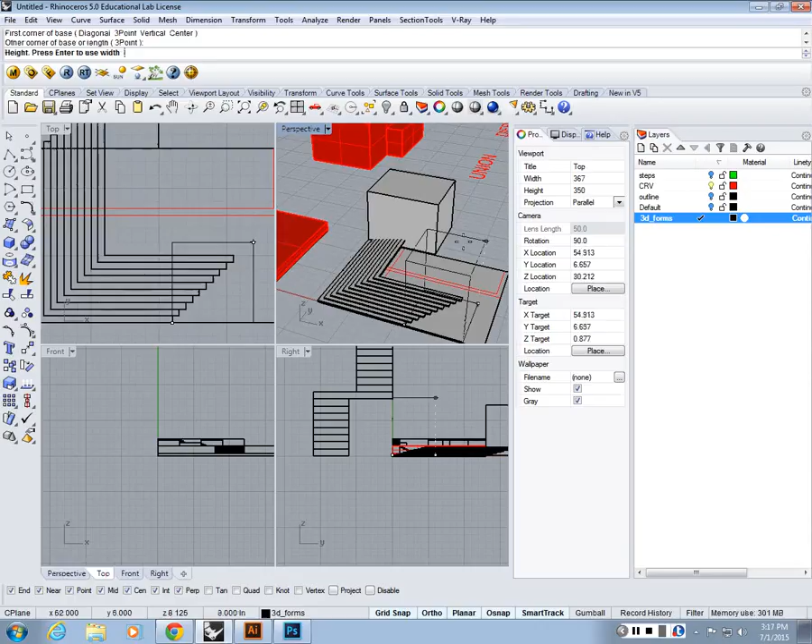One solid here, and then another solid on the other side, right? And I'm going to use them to subtract from the staircases. So I could choose the staircases. I'm holding shift on my keyboard to add to the selection. Then I'm going to do Boolean difference.

These are the surfaces I want to subtract from. Now it says select surfaces or polysurfaces to subtract with. I'm going to choose these two guys, right click, they will be trimmed along that corner. So I'm going to type in Boolean difference. It says select surfaces or polysurfaces to subtract from. I'm going to choose everything, alright?

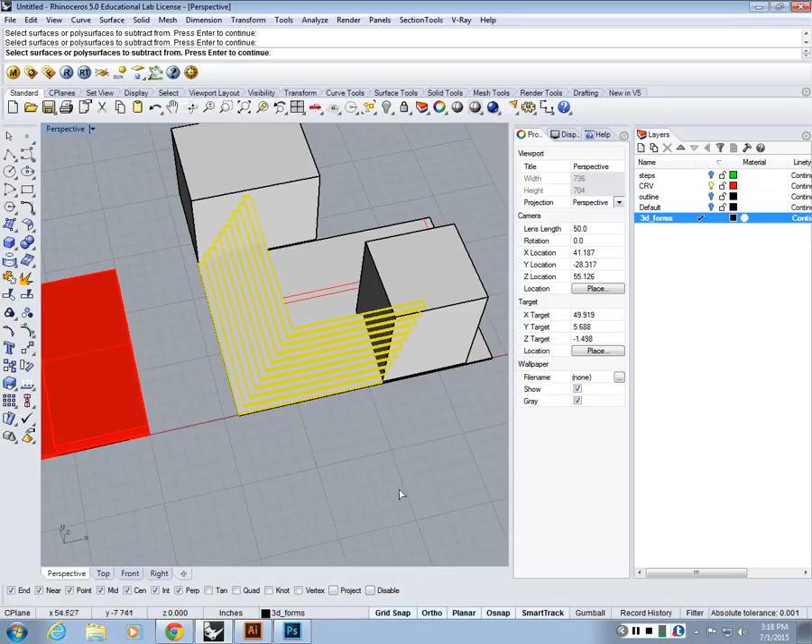And then I'm going to hold control and deselect geometry from the selection so that I only have the steps left. Then once the geometry group I want to subtract from is confirmed, I hit right click. Now I want to subtract this guy and this guy, and then right click again. Those two are subtracted. And then the next thing I want to do is model the solid here.

So I can do it out of rectangle blocks again. I come in here, do a single solid extrusion up to here, and do another one up to here. I'm not sure if this is how your model was, but I guess that's okay. Right, so that's kind of the corner steps and the plateau.

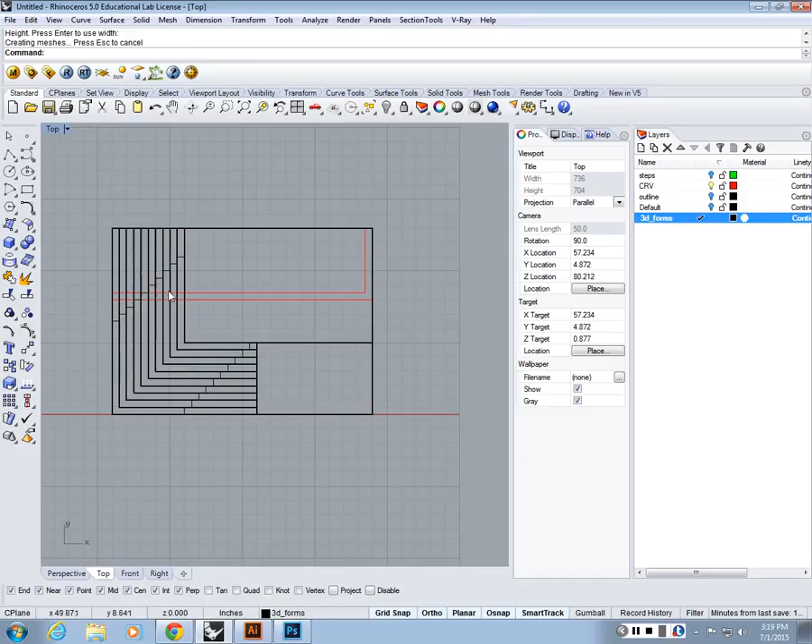Now I need to dig in this tunnel from it. I'm going to basically model this rectangle here, and then that rectangle is going to go all the way up to the bottom of the top stair, so that when I subtract it, the top stair is preserved.

So I can do scale 1D. This guy is going to be lined up with the bottom of the top stair. So that's kind of the form I'm going to subtract from the stairs. And then let's make it more interesting.

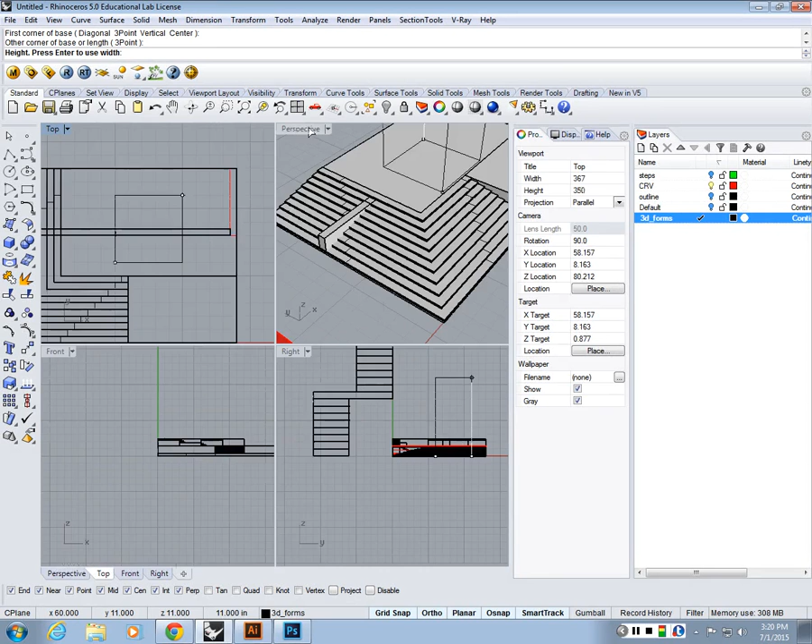Let's say we have a courtyard here. I can make a square courtyard as well, so I'm going to model a square. And since this is going to be subtraction, its height doesn't matter — I only need something to subtract with.

Now I'm going to do a Boolean subtraction, so Boolean difference again. Now my set is important, so I do Boolean difference. What do I want to subtract from? I want to subtract from these steps and this geometry as well, so I'm going to choose the steps.

And I want to choose this guy here. Once that selection is made, I hit right click to confirm. Now the geometries to subtract would be this geometry and this tunnel extrusion. Once I right click, the Boolean subtraction is done — it calculates what to subtract from what and gives me the result.

And I can do these in clusters as well, so multiple geometry subtractions I can do simultaneously.

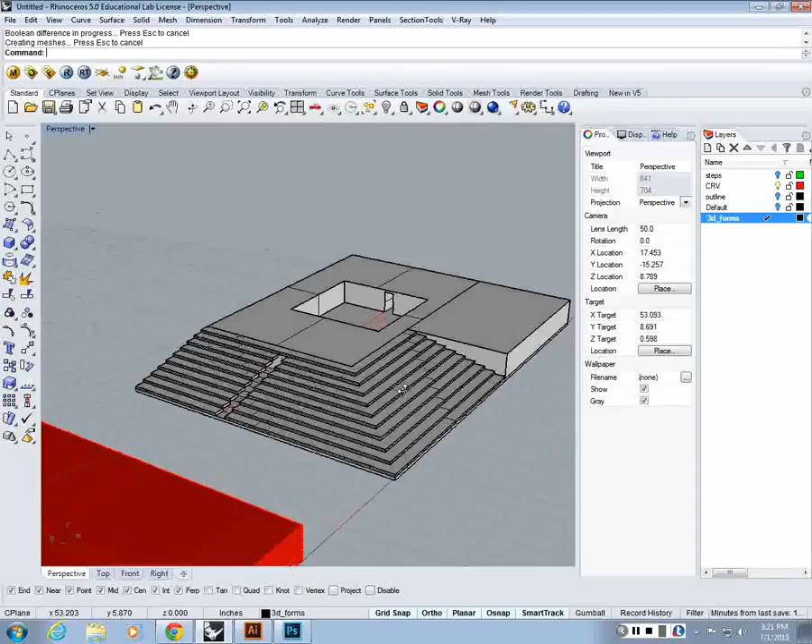Any questions? In a minute. Okay.

What you can do is, let's say you have drafted your stairs or steps or some sort of profile you want to use for cutting something, right? And it could be anything — it could be steps, it could be levels. I'll keep this one on the side for now, but let me show you what I mean. Let's say there are some steps here that I need to subtract.

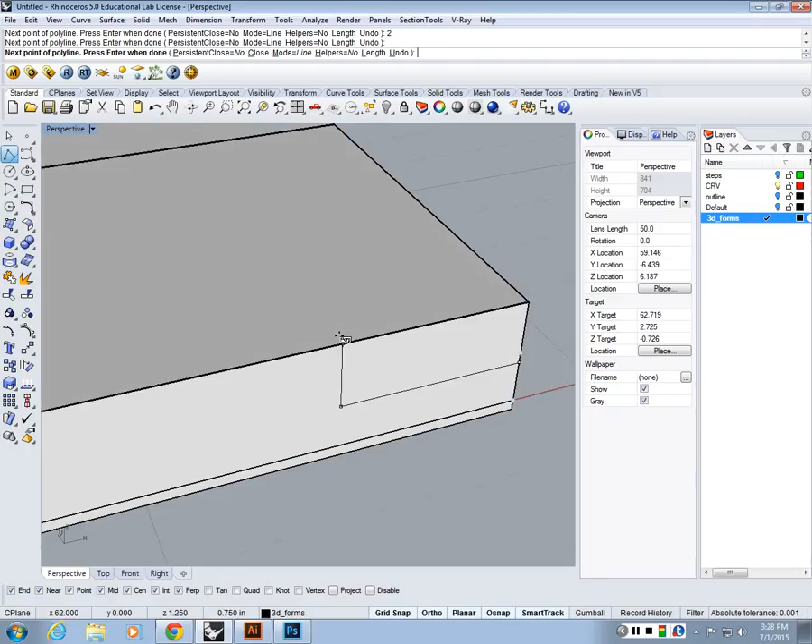So I'm going to draft some lines — let's say by 0.5, and then I can go horizontally, let's say 2. Then let's go up by 0.5 again, then this way by 1, and then go up again.

So let's say I want to use this to trim the corner of this geometry. To do that, you go to Solid Tools — there's Wirecut here. If you look at the symbol, there's basically a solid and a line used to cut and subtract from it. The shortcut would be Wirecut as well, so you just type in Wirecut. Then it says select cutting curve.

I'm just going to choose this guy as my cutting curve. Right after that it says select objects to cut — I want to cut this guy. Now it's asking me to enter how much I want to cut into that object, so I enter a dimension, let's say 2, and I need to choose a side for extrusion. So I choose this side, and then it asks for a direction for subtraction.

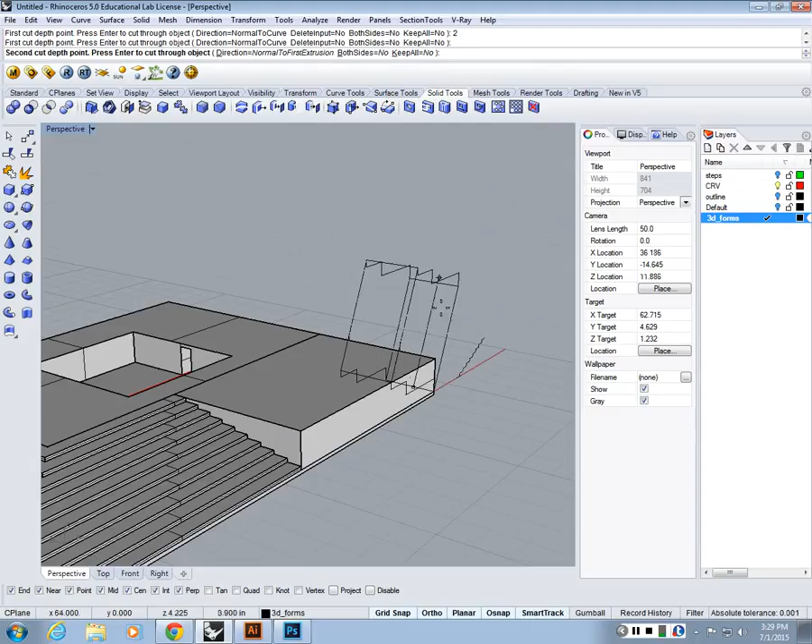Normally it goes along the perpendicular direction, but you could come into the direction option and choose pick, then draw a vertical line along that edge so your extrusion goes up. Did it work? It actually didn't work. Let me try it again.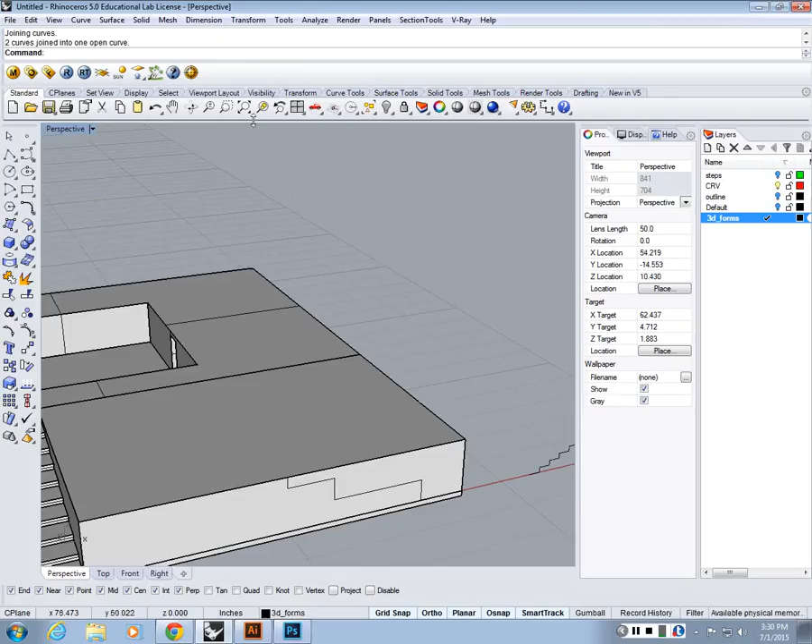I think it doesn't like when the edge of extrusion here overlaps. Let me see — if I do something like this, it works with the steps I made, but I have to find a way to get them. So let's try it again: Wirecut, cutting curve, cutting object.

Extrusion 2 inches this way, and then direction — I want to pick it to be Z, so I go up. Maybe my curve is not overlapping. Let's try this again. Wirecut.

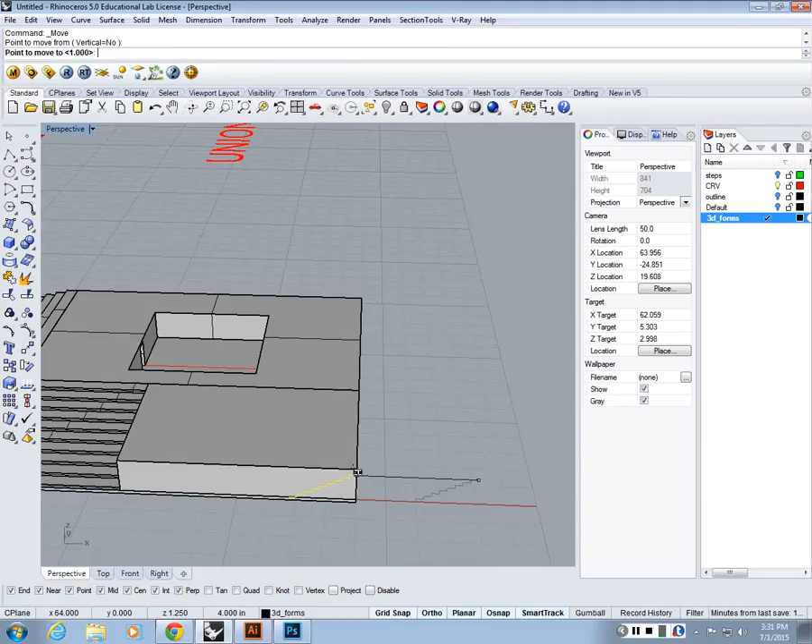Cutting curve, solid, direction — well, it works for this one. It basically enables you to use a profile, extrude it, and then do extrusion and Boolean subtraction operations all in one, using just an outline curve.

Let me try it again. I wonder why it doesn't like this guy — maybe the line I drafted wasn't flat. That may be it. Wirecut.

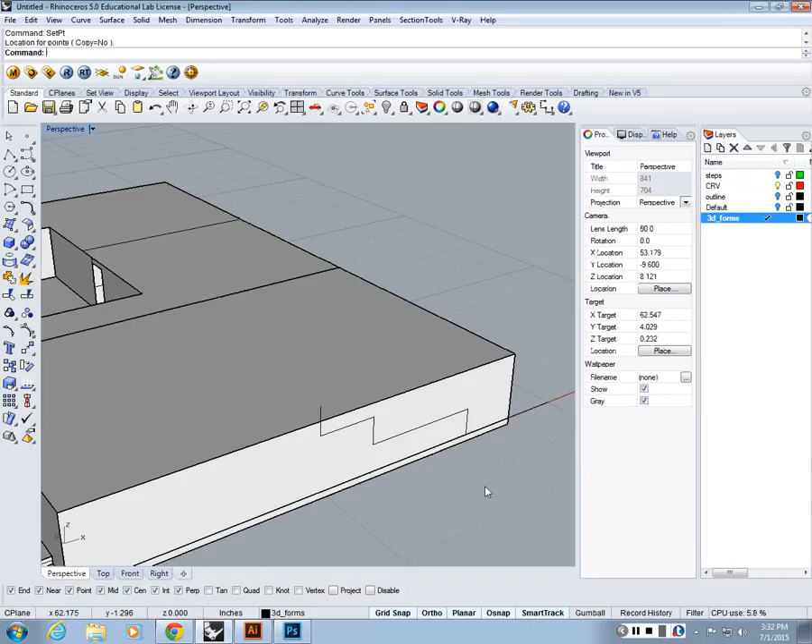Yeah, it wasn't flat. But it's not giving me a good result actually.

So when you do wirecut, let's say you have the profile drafted on the side of the block you want to cut from. You choose the curve, then the solid object, and then you can enter the depth of that profile. So let's say there are these steps along that corner, and they're like 2 inches in. My direction for extrusion is going to be all the way up Z, so you can override the direction and choose Z. So you go up.

It's buggy. Using that a lot.

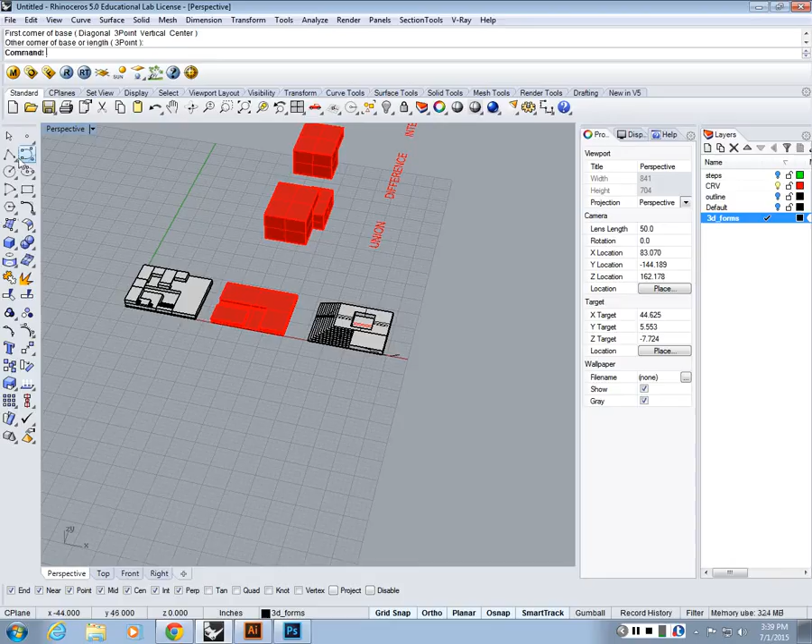So what were the dimensions of the solids you were going to add to your part 2 of the assignment? Wait, 34 by 34? 34 what, inches? Feet? What is it in inches? 4.25? 11? And then the same 4.25 for the thickness of it? Probably.

So this is it? Extrude curve 4.25 by 4.25 by 2.

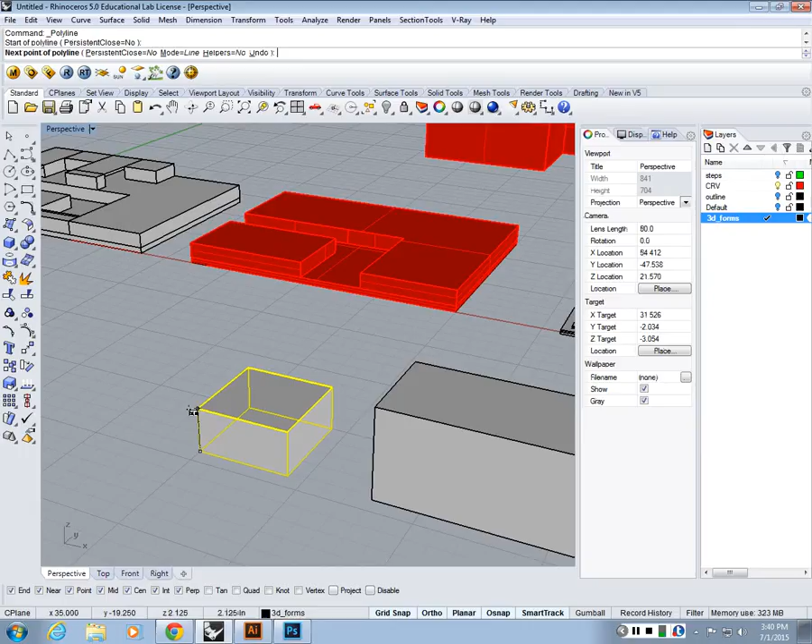Okay, 21 divided by 8, no, 21... yeah, 2.625. Okay, this guy is 2.625, this guy is 4.25, okay, and then 55 divided by 8 is 6.875. Alright, these are the blocks.

Correct. Alright, so now let's look at what shell does. I'm going to make copies of this. The shell command helps you start with a solid block and then carve it out while maintaining some of the walls with thicknesses. It's located under solid tools, right here - Shell Close Polysurface is the command, or you could type shell for the shortcut.

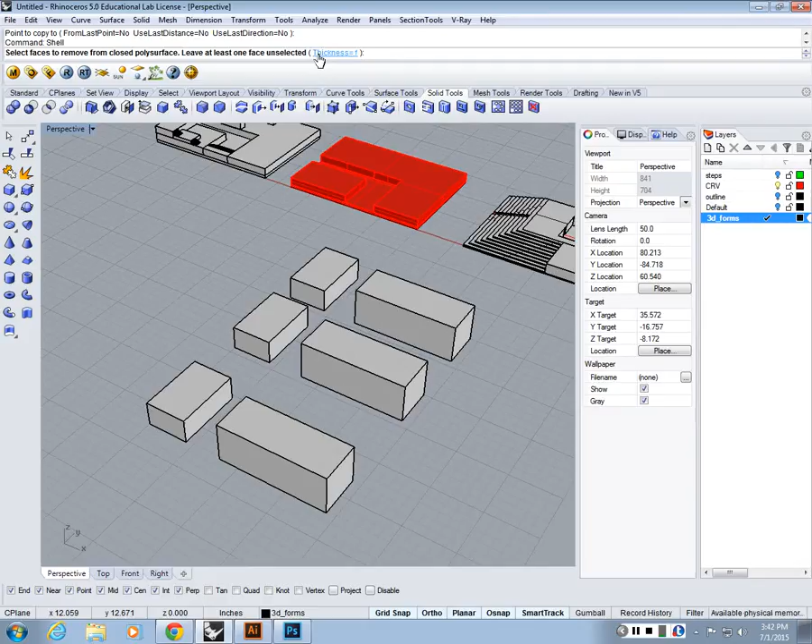And the thickness we're going to enter is what, 1/8? Yes. So if I want to have these two walls taken out and the rest shelled out, I could just choose these two faces and right click, and that's what shell does. It basically starts carving out the solid from those edges and then offsets the rest of the surfaces with the nominal thickness I entered and makes it into a shell. This is a pretty nice command because you can do it on multiple faces at the same time.

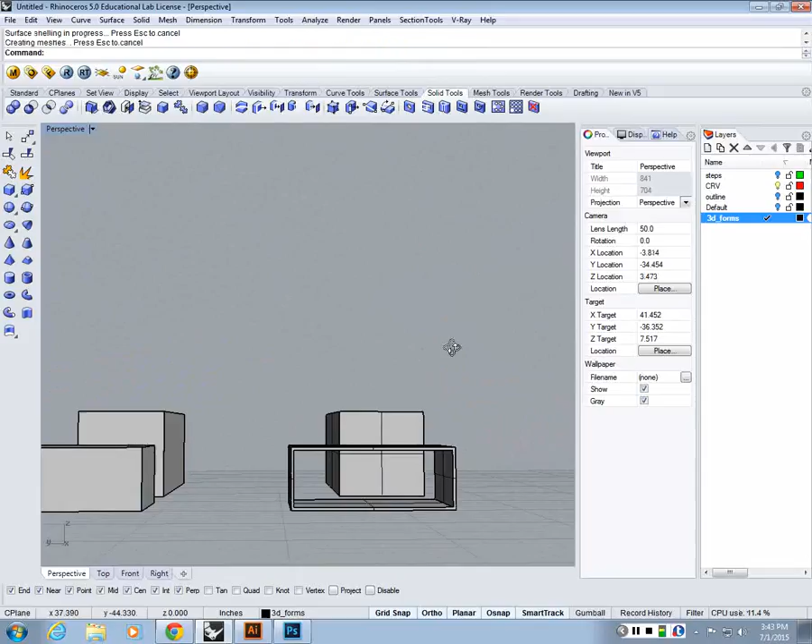Let's say I want to choose, let's look at this one. I'm going to run the shell command again. I want to choose this edge and then this edge. It will basically make it hollow using those two surfaces as an input. Let's do another one - 1, 2, and maybe 3. It will take those faces out and offset the remaining faces with the shell thickness I'm entering and make it into a solid block, right? So these are basically solid still.

So I could do shell again. Let's try doing maybe like this. So it gives me 3 walls. Okay, this is one way of starting with the shell.

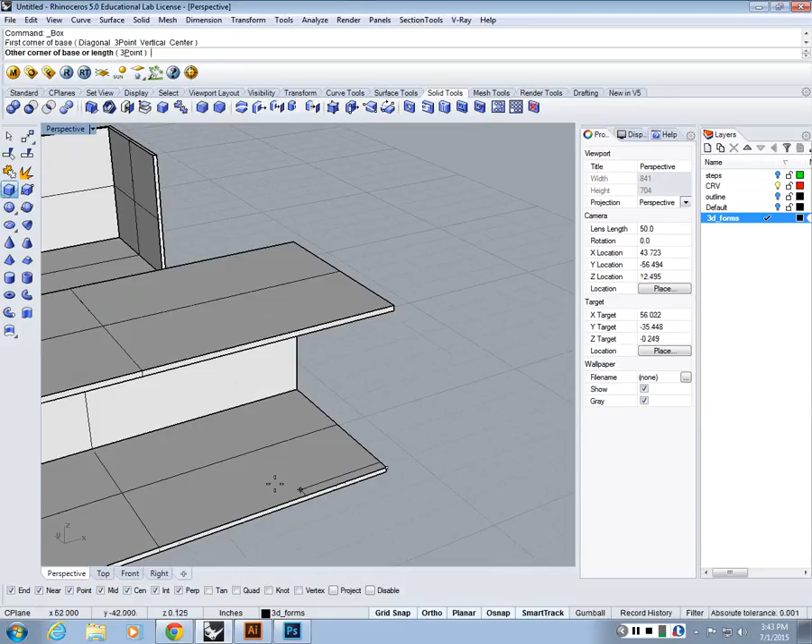But I think for this assignment, you could do these blocks partially with shell and partially you can add blocks as well. So you're taking these out, then you can come in and add maybe something to this corner, and the thickness of that could be the same thickness, so it's going to be 1/8. You won't be able to do it with the shell command - the shell command takes in the face of a solid directly, but you can then add other solids to it.

Okay, then you can measure them. Let's say this guy is going to the middle, so maybe that's one of the blocks. And I think these could be horizontal or vertical, right? Yes, as long as you are defining the volume, you're good.

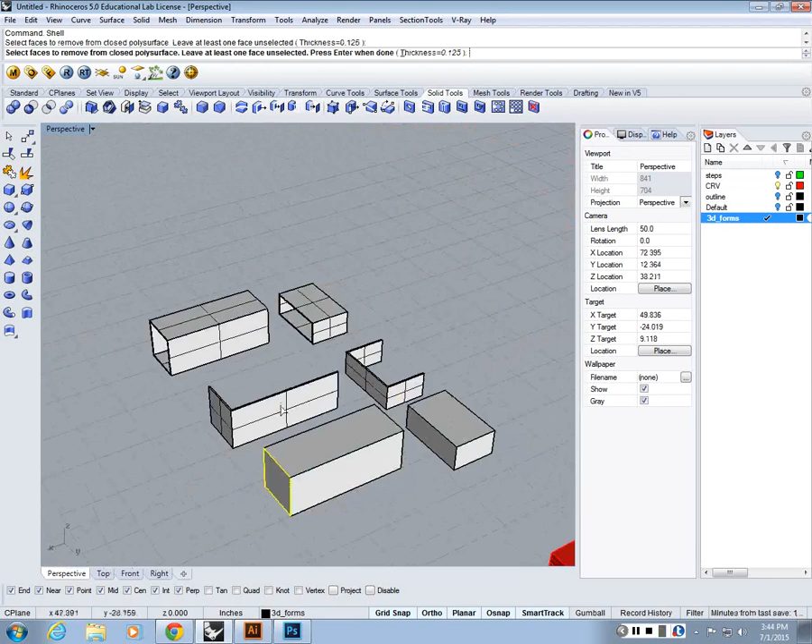Alright, so you can combine shell - you can also do that, it's like a U shape. And then you can also do other Boolean stuff. Let's say you want to take something out, you could do Boolean Difference, right? You can take it out. Or you could do one like this from this guy - this will still show the same volume, right?

You can come up with cool stuff.

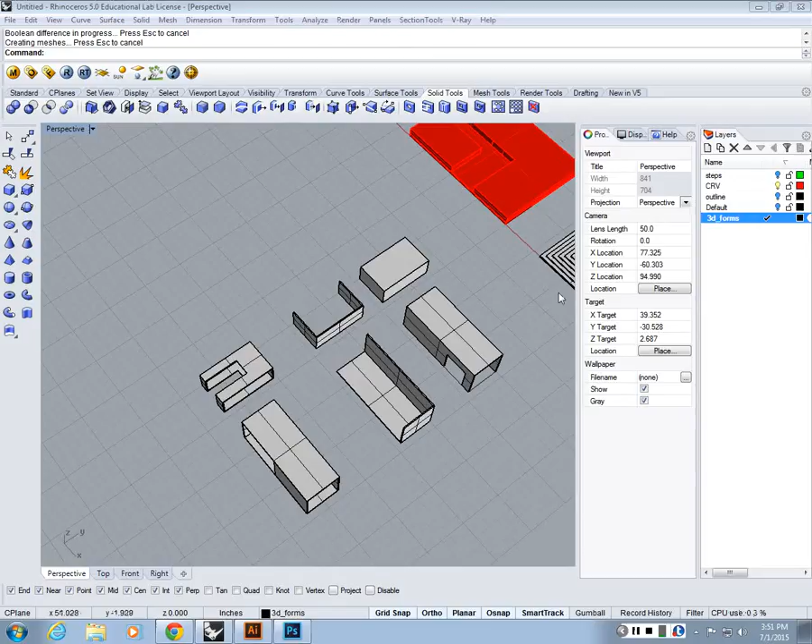Another thing I want to tell you is you can lock movement or displacement to the vertical axis. So for instance, let's say I want this guy to be at a specific height. If I'm typing in move, look at the move command, there is a vertical option as well. So if you choose vertical yes, any value you enter will move the object on the vertical axis. So if I want to move this up by 2 inches, I enter 2 inches and it will move up vertically by 2.

Otherwise, you can snap from point to point - it's the same thing, you can still move vertically by snapping from point to point, but if you don't have anything to move to, you can also make displacements vertically, like that. I basically typed in move, selected the object, and then enabled vertical yes, so it becomes a vertical displacement.

Yes, hold shift basically, so it's like orthogonal displacement. Yeah, it will keep moving.